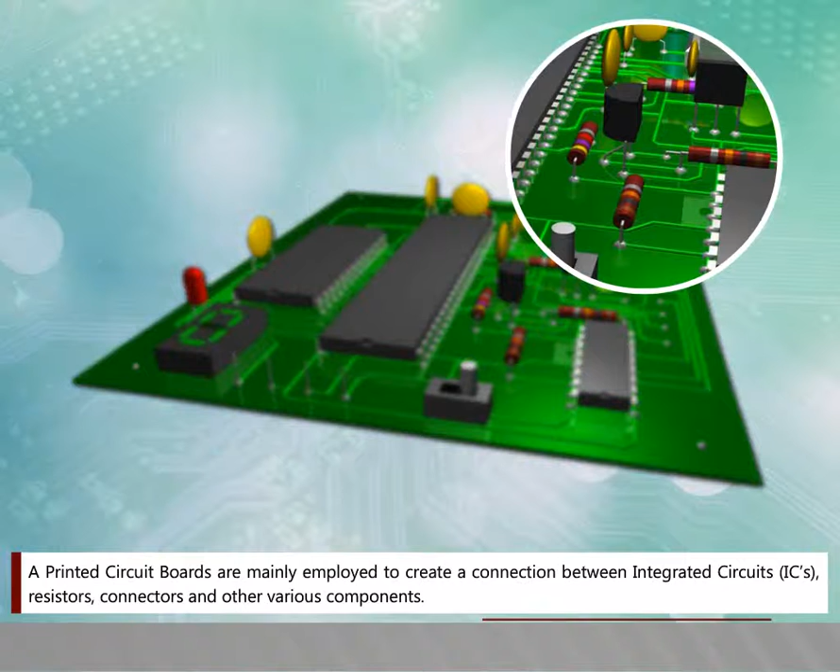Printed circuit boards are mainly employed to create a connection between integrated circuits (ICs), resistors, connectors and other various components. An electronic equipment is a combination of electrical and electronic components connected to produce a certain designed function.

In earlier days, electronic equipment was constructed by hand wiring and point-to-point soldering. During wiring, the wires were stripped of their insulation, tinned and soldered. Each discrete component was installed by hand, electrically and mechanically, and the circuit was too bulky and big to manage. So it was difficult to meet the demands for using those bulky equipments in aircraft, the health sector, and home emergency uses.

At these conditions, it became necessary to develop smaller and more compact electronic equipment. Smaller components were developed, decreasing the time between unit failure and repair due to easy replaceability. The use of miniaturization and sub-miniaturization in electronic equipment design led to a novel approach in inter-component wiring and assembly, known as the printed circuit board.

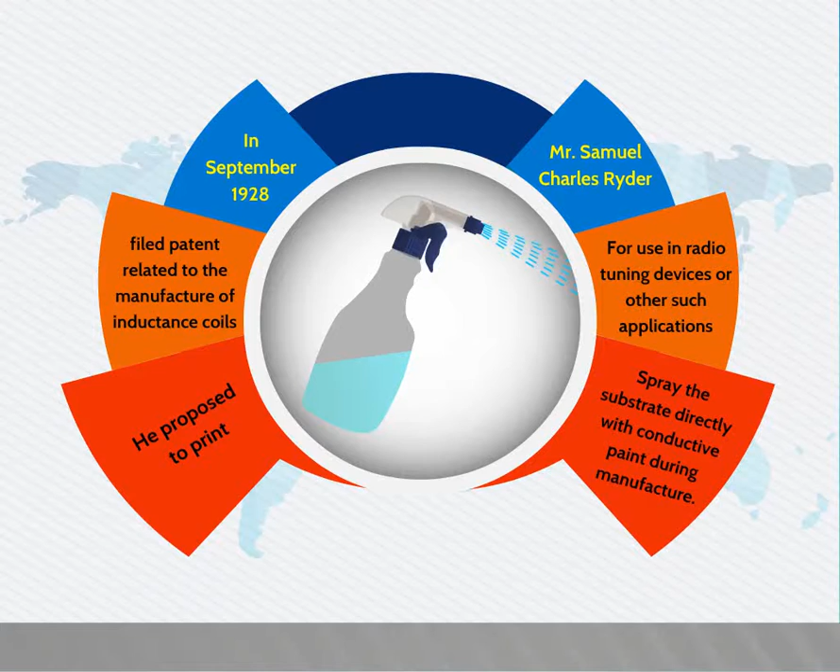Similarly, Mr. Herbert C. Alt, in July 1935 in America, again emphasized the avoidance of wires as the basic purpose of the development.

The major contribution towards the development of modern printed circuit technology came from Dr. Paul Eisler, who proposed copper-clad insulation material in sheet form for use as the base material in circuit board manufacture. He also proposed the generation of conductors on both sides of the copper-clad base material, with connection between conductors on both sides being made through eyelets.

So Dr. Eisler is often called the father of printed circuit board technology.

In the 1960s, the electroless method was introduced using catalyst activators, while Photocircuits USA developed the fully additive process in 1964. In this method, the base material does not have copper on it, and the copper is plated selectively on the required places for interconnections.

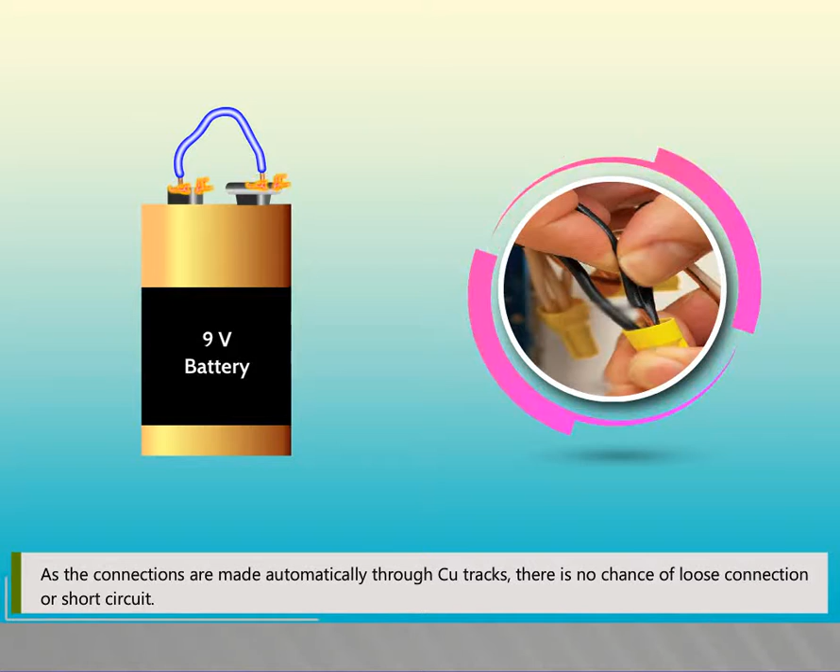The interconnections are made through copper tracks instead of using wires that carry the circuit. Much time is saved in assembling a circuit on printed circuit boards compared to the conventional one. As the connections are made automatically through Cu tracks, there is no chance of loose connection or short circuit. The size of component assembly is reduced with a corresponding decrease in weight.

Quantity production can be achieved at lower unit cost. Component wiring and assembly can be mechanized. Circuit characteristics can be maintained without introducing variation in inter-circuit capacitance. They ensure a high level of repeatability and offer uniformity of electrical characteristics from assembly to assembly.

The location of parts is fixed, which simplifies identification and maintenance of electronic equipment and systems. Inspection time is reduced because printed circuitry eliminates the probability of error. Printed wiring personnel require minimal technical skills, and chances of miswiring or short-circuited wiring are minimized.

Disadvantages of printed circuit boards.

As the copper tracks are very thin, they can carry little current, hence a PCB cannot be used for circuits with heavy currents, because in that case the strips will be heated up and can cause problems. Soldering needs precautions.

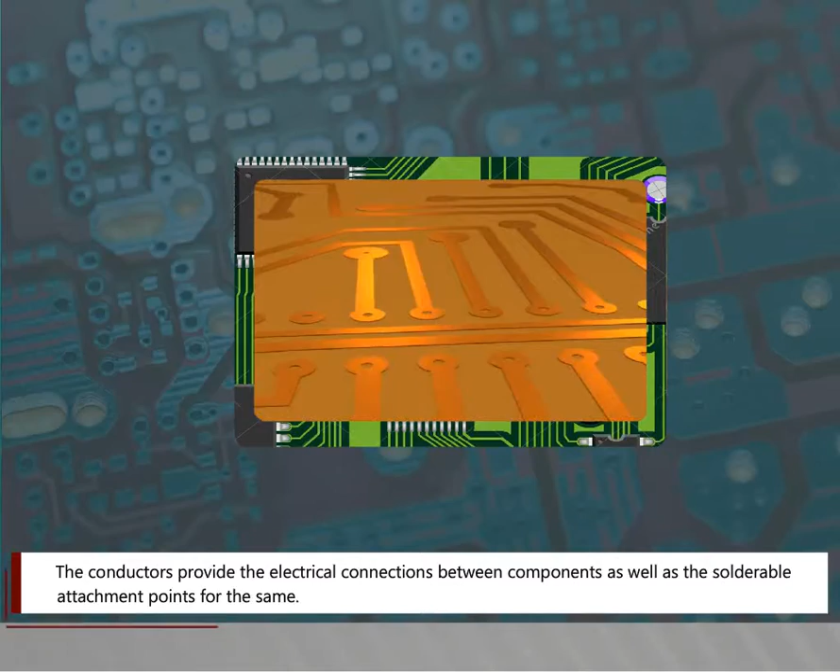The conductive areas are usually generated by means of a printing process like screen printing or photo engraving, which are commonly used to print drawings or inscriptions. So the term print became popular, hence it was named.

Composition of printed circuit boards. In this video, we are going to see the composition of a printed circuit board.

In PCB, there are alternating layers of different materials which are laminated together with heat and adhesive, which results in a single object.

Substrate. The base material or substrate is usually fiberglass. The commonly used fiberglass is FR4. This solid core gives the PCB its rigidity and thickness.

Copper. The next layer is a thin copper foil which is laminated to the board with heat and adhesive. On common double-sided PCBs, copper is applied to both sides of the substrate, whereas for lower cost, the PCB may have copper on only one side.

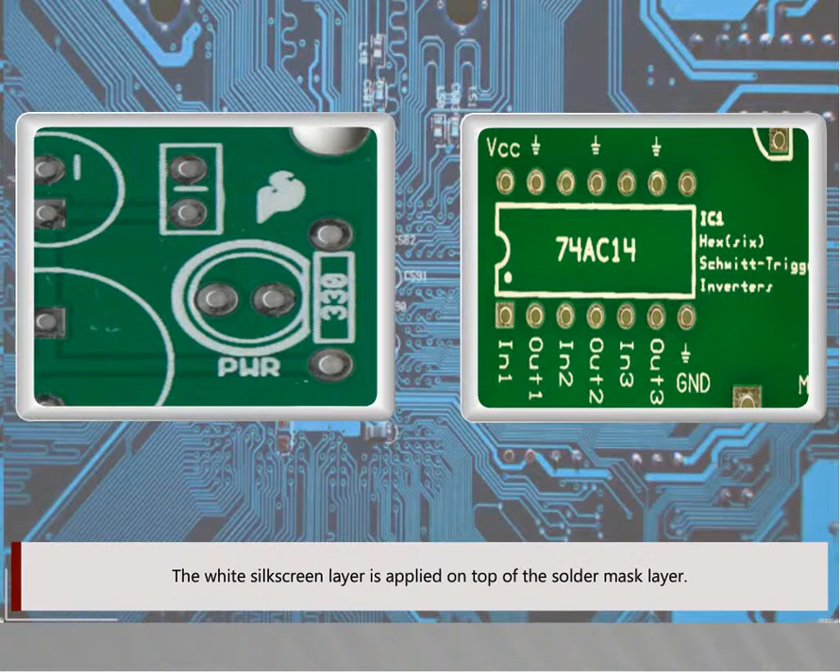Silk screen. The white silk screen layer is applied on top of the solder mask layer. The silk screen adds letters, numbers and symbols to the PCBs that allow for easier assembly and indicators for humans to better understand the board. Silk screen labels are used to indicate the function of each pin of an IC or LED.

Manufacturing of printed circuit boards, that is PCB. In this video, we are going to see how the printed circuit board is manufactured. The steps followed in the manufacturing of PCBs are given below.

Pre-processing, photolithography, etching, stripping, tin plating, drilling, solder masking, loading of components, soldering.

Pre-processing. In pre-processing, all the initial preparation is made before actual processing of the copper-clad laminate starts, which includes: layout of the circuit diagram should be taken as a printout.

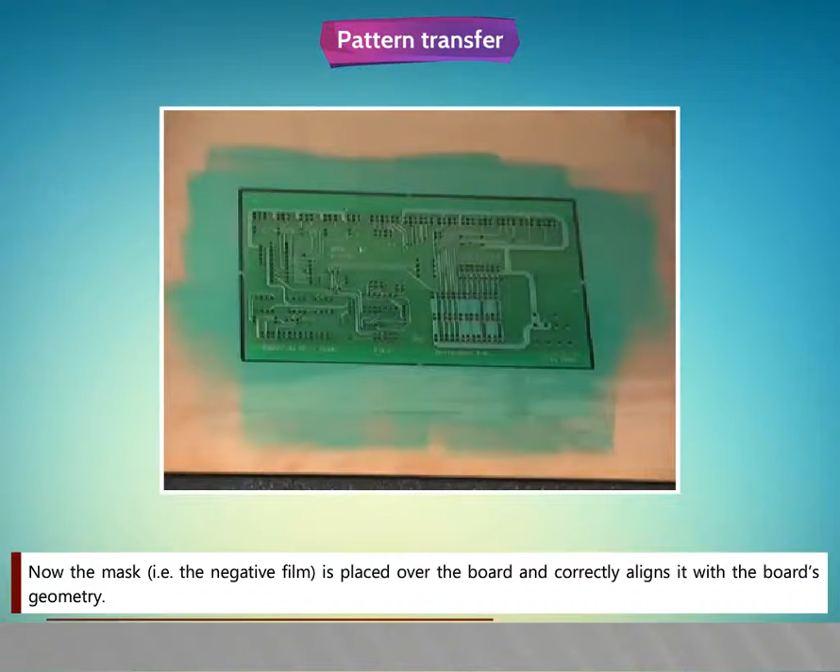The UV light falls on the photoresist only through the lighter or transparent part of the mask. To keep the negative film in position, masking tapes are used. The UV exposure machine is switched on for 3 minutes. Thus, the photoresist changes its properties only where exposed to radiation. Take out the boards from the UV enclosure by holding it from the edges, using forceps.

Development. After exposure, the pattern's image is transferred onto the photoresist and is to be developed. The development stage involves 2 steps based on the type of resist. For negative resist, unexposed areas of resist are removed. For positive resist, exposed areas of resist are removed. Here, we are explaining the negative photoresist method.

In a tray, sufficient developer solution is poured such that the board can be completely dipped in it. Developer solution is prepared by mixing liquid photoresist developer concentrate, 1 part, with 9 parts of water.

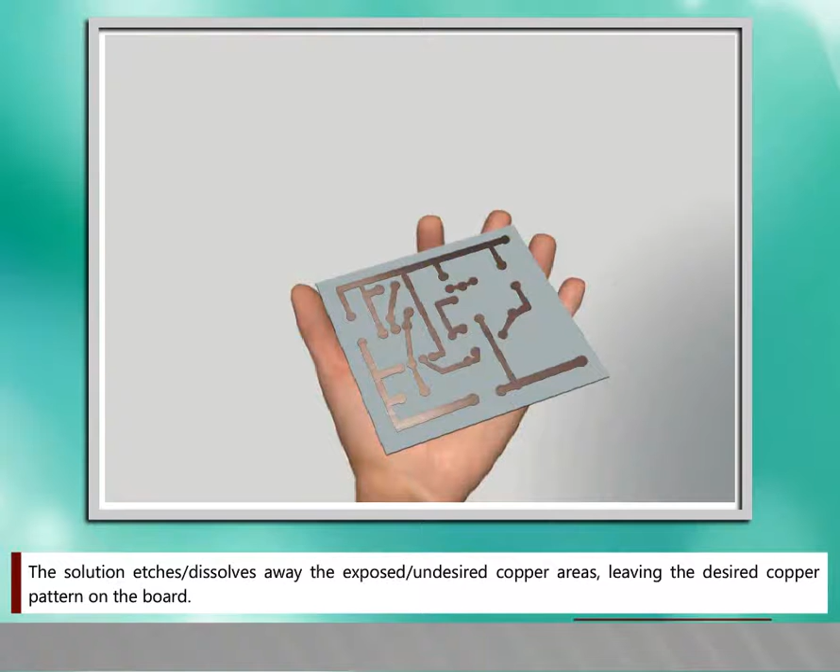The board obtained after photolithography is dipped in an etching solution and agitated for 6 to 10 minutes at 40 degrees Celsius. The solution etches or dissolves away the exposed or undesired copper areas, leaving the desired copper pattern on the board. Ferric chloride is the most commonly used etchant.

Step 4: Stripping. The negative photoresist coating left on the copper pattern can be removed using a tube of photoresist stripper after the etching process. The PCB is washed under tap water and dried using tissue paper.

Step 5: Tin plating. Tin plating is the process of providing a fine finish and protection to the copper from oxidation, which aids soldering to appear neater and flow better. A fine tin powder is mixed with water to make up a solution in a basin. The board is placed in the solution for 10 minutes to achieve a silver finish on the board.

Step 6: Drilling. Drilling is a process employed to create the component lead holes and through holes in a PCB. These holes pass through the land areas and should be positioned correctly.

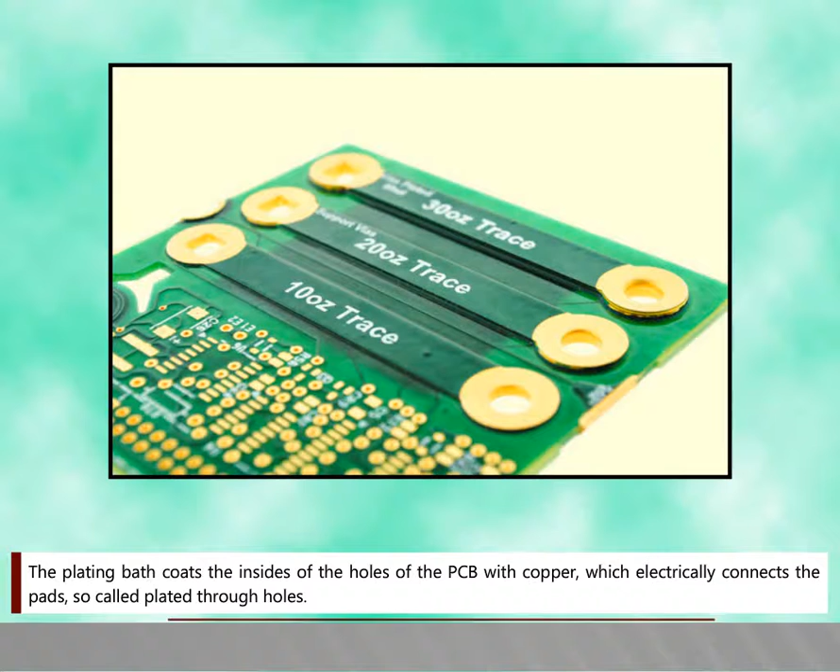To make electrical connections between pads on different layers of the PCB, the board is placed into a plating bath. The plating bath coats the inside of the holes of the PCB with copper, which electrically connects the pads, so-called plated through holes. The clearance is larger than the normal pad size to ensure that the plane stays isolated from the plated holes.

Solder masking. Next, a thin polymer layer is usually applied to the top and bottom of the board. This layer is called the solder mask or solder resist. Holes are opened into the polymer where the components will be soldered to the board.

To expose the pads and holes, the photolithography method is used. The solder mask protects the top and bottom copper pattern from oxidation and helps prevent solder bridges from forming between closely spaced pads.

Finally, silk screen markings are placed on the board to identify the position where components are to be placed. The silk screen is marked in white.

Step 8: Loading of components. Loading of components can be done manually or automatically.

Manual assembly can be tedious work and is typically used for prototype and low volume work. In post-automated assembly for odd form components, manual assembly is used. Both surface mount technology (SMT) and through-hole technology (THT) components may be assembled manually. In low volume work, an assembly line consists of several assemblers in which each person is responsible for mounting specific components. Manual assembly may involve both manual placement and soldering of the specific component, or a mixture of manual placement and automated soldering of the attached component, which can be interrupted several times.

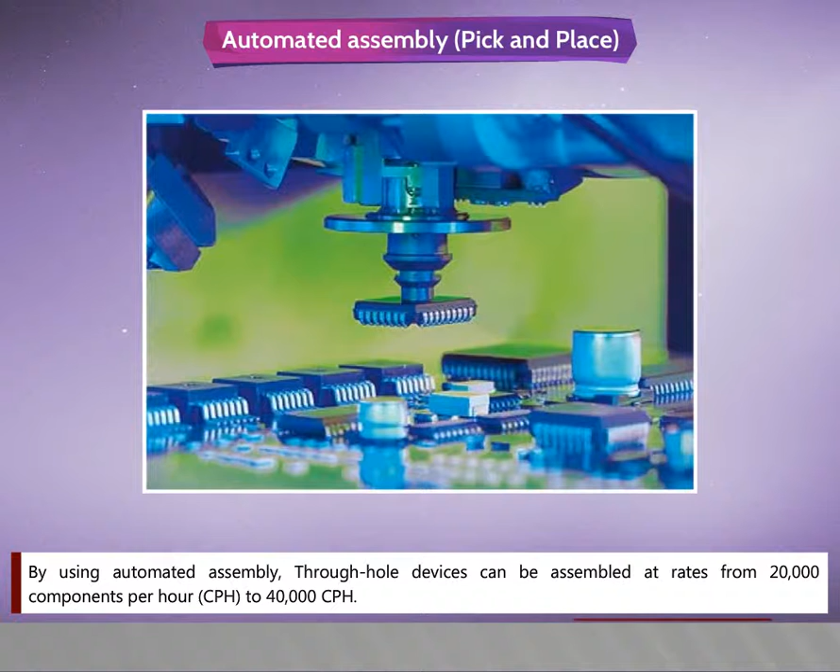Automated assembly, that is pick and place. Automated insertion processes exist for both surface mounted devices (SMD) and through-hole devices (THD), which include both axial leaded and radial devices. Automated machines are programmed to extract parts or components from reels or bins and place them on the PCB in the correct location and orientation. By using automated assembly, through-hole devices can be assembled at rates from 20,000 components per hour (CPH) to 40,000 CPH.

Soldering is used to attach the components physically to the PCB and also to provide electrical conductivity between the components' leads and the PCB traces. An intermetallic compound or alloy must be formed between the solder and the base material, that is the leads and traces, for the soldering process to be successful.

To protect the solder joint areas from oxidation, contact areas of the PCBs are dipped in a solder bath to receive a surface finish, and hot air solder leveling or plating processes such as electroless nickel or palladium are used. Just prior to or during soldering, the surfaces to be joined are cleaned, that is deoxidized, with flux so that the solder can flow over the PCB neatly and wet the surfaces of the PCB.

There are two general soldering methods: mass soldering, which includes wave reflow, vapor phase reflow, oven reflow, and conduction reflow; and directed energy, which includes hot gas, hot bar, laser, iron, and pinpoint torch.

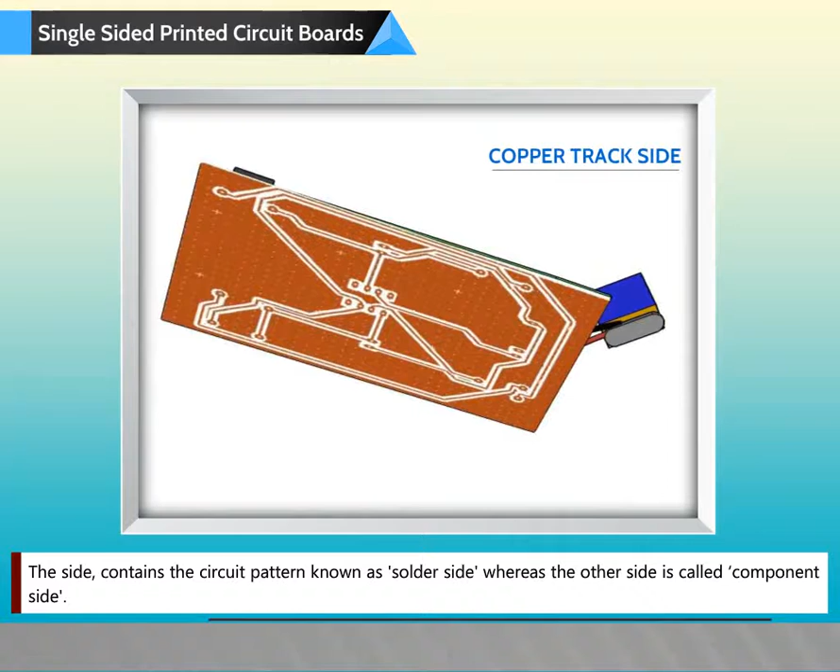The single-sided boards are manufactured by either the print and etch method or by the die-cut technique, using a die which carries an image of the wiring pattern, and the die is either machine engraved or photo engraved.

Normally, components are used to jump over conductor tracks. If that is not possible, jumper wires are used. The number of jumper wires on a board cannot be accepted beyond a small number due to economic reasons, which results in the requirement for double-sided boards.

Double-sided printed circuit boards. This video explains about double-sided printed circuit boards. Double-sided means having the wiring patterns on both sides of the insulating material. Thus, the circuit pattern is available on both the component side and the solder side. Compared to single-sided boards, the component density and conductor lines are higher in double-sided boards.

Double-sided non-PTH board is an extension of a single-sided printed circuit board. Its cost is considerably lower because of the absence of plating. In a double-sided non-PTH board, through contacts of the components are made by soldering the leads of the component on both sides of the board wherever necessary. The number of solder joints on the component side should be kept to a minimum at the layout design stage, to facilitate component removal from the board if required.

The conductor should be realized on the non-component side as much as possible, and only the remaining components should be placed on the component side. The non-plating technique in double-sided boards is shown, in which the interconnection is made by a jumper wire. A formed insulated solid lead wire is placed through the hole, clinched, and soldered to the conductor pad on each side of the board.

Different types of eyelets are also used for double-sided board interconnection. They are: funnel flanged eyelet, split funnel flanged eyelet, and fused in place eyelet.

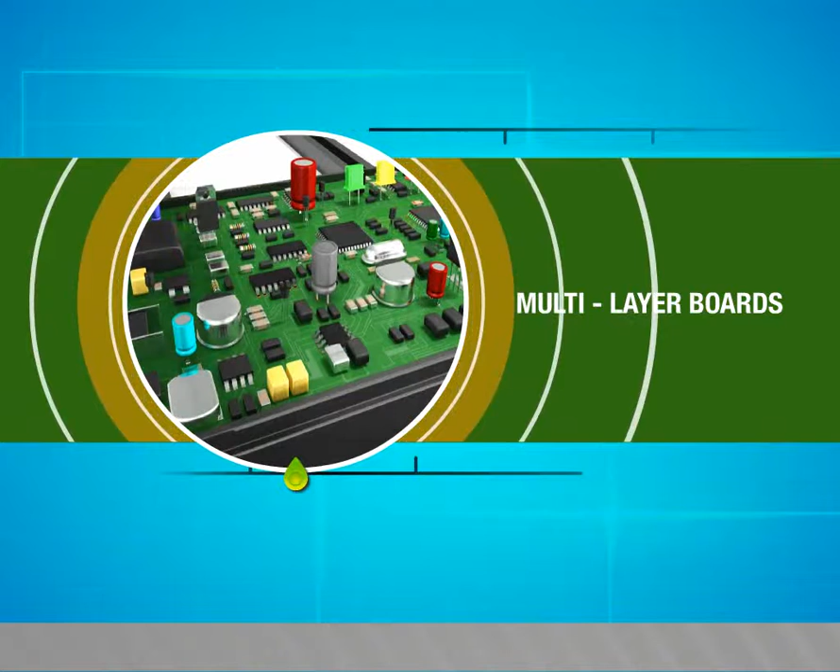Multi-layer boards. This video explains the multi-layer printed circuit board and drawbacks of plated through hole technology.

The multi-layer board makes use of more than 2 printed circuit boards with a thin layer of pre-preg material placed between each layer to make a sandwich assembly.

The printed circuit on the top view is similar to a conventional printed circuit board assembly, except that the components are placed much closer to each other, or they may have many terminals, which insist the use of additional board layers for the required interconnections.

The electrical circuit is completed by interconnecting the different layers of PCB by plated through holes, placed transverse to the board at allotted places.

In multi-layer PCBs, all the interconnections can be placed on the internal layers of the PCB, and a heat sink of thick solid copper can be placed on the outer surfaces of the PCB. By mounting the components directly on the metallic surfaces, the problem of heat removal and heat distribution in systems can be minimized.

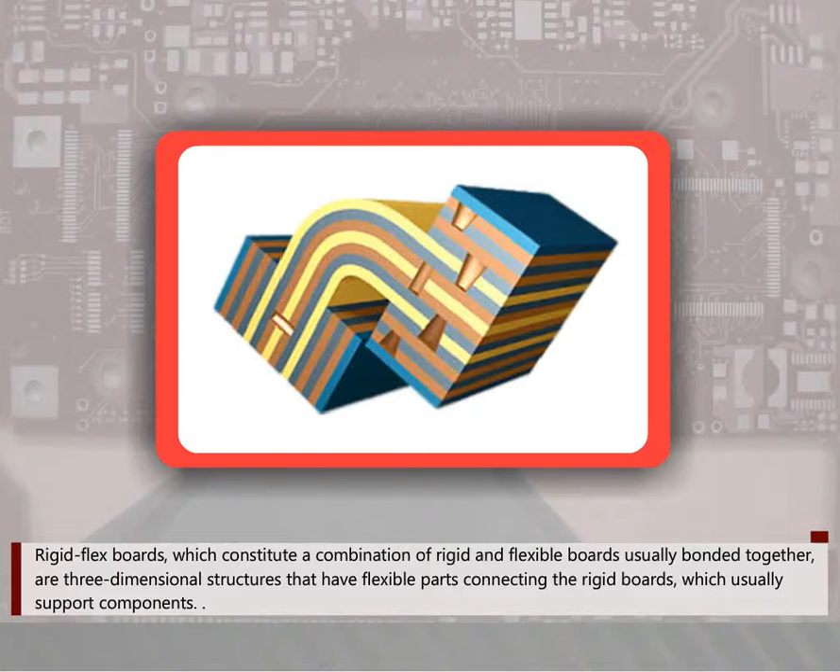Rigid flex PCBs constitute a combination of rigid and flexible boards usually bonded together. These boards are three-dimensional in structure, having flexible parts connecting the rigid boards in order to support components.

4-layer rigid flex circuit. A 4-layer combination rigid flex circuit has 4 conductive copper layers. Typically, a 4-layer has 2 flexible layers and 2 rigid layers.

6-layer rigid flex circuit. A 6-layer combination rigid flex circuit has 6 conductive copper layers. The two most common design types are: 6-layer rigid flex with 2 flex layers and 4 rigid layers, or 6-layer rigid flex with 4 flex layers and 2 rigid layers. 8-layer rigid flex circuit.

Rigid flex circuits combine the best of both rigid boards and flex circuits integrated together into one circuit. The 2-in-1 circuit is interconnected through plated through holes.

Rigid flex circuits provide higher component density and better quality control. Designs are rigid where extra support is needed and flexible around corners and areas requiring extra space.

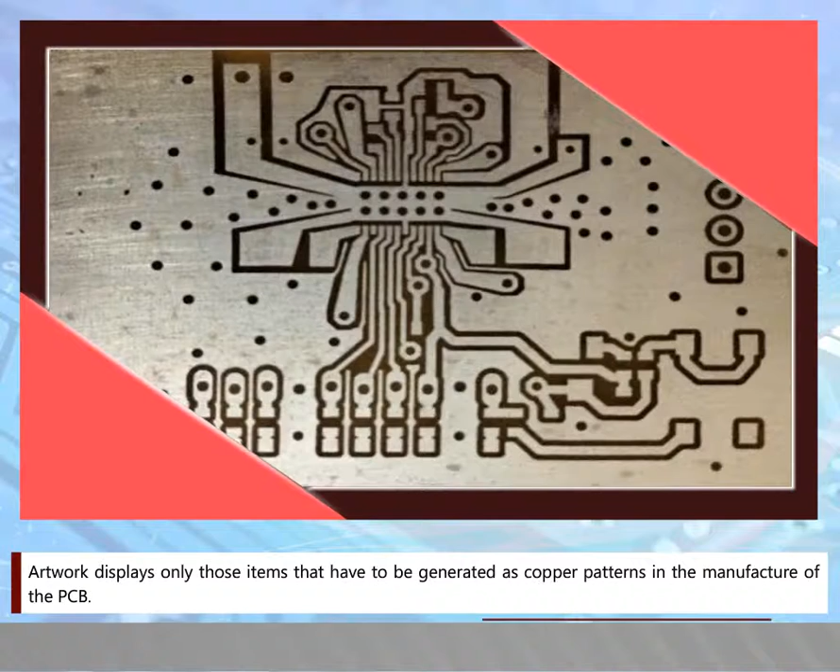Artwork displays only those items that have to be generated as copper patterns in the manufacture of the PCB. Therefore, the artwork will necessarily include solder pads, lands and conductors true to scale in respect of their dimensions, but shown at the scaled level.

In addition, the artwork will also show lines that represent the boundary of the board. Since the artwork is the first step of the PCB manufacturing process, it has a great influence on the final product. Obviously, the final product can only approach the quality and accuracy of the artwork.

The generation of artwork to the requested sophistication is highly dependent upon the area, that is board size and accuracy. Therefore, the importance of a perfect artwork should not be underestimated.

Problems like inaccurate registration, broken annular rings, or too critical a spacing observed on the PCBs often occur due to bad artwork. Developing a clean and exact artwork necessitates skills and patience on the part of the personnel entrusted with the task.

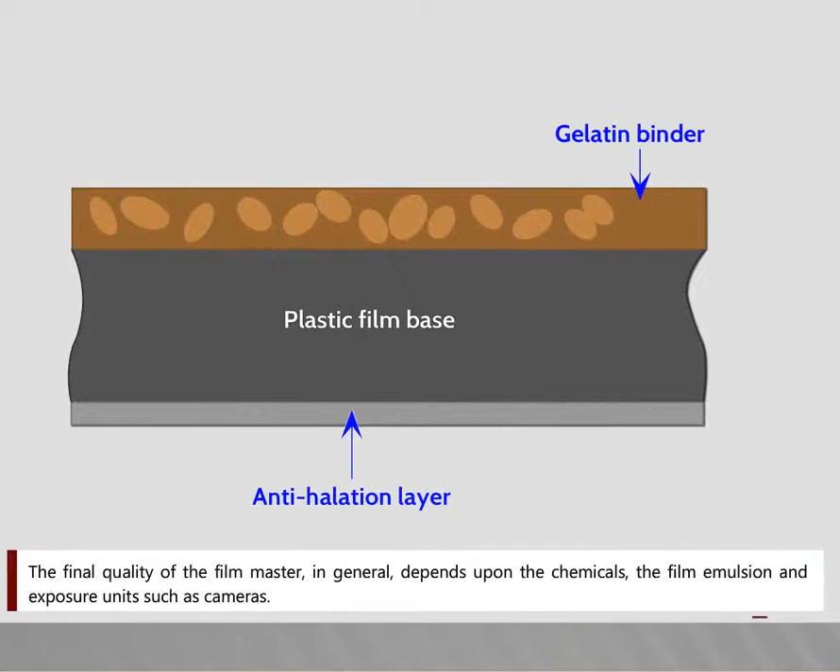In order to ensure PCBs of high quality, the film master must have dimensional accuracy, sharpness, and wear-out resistance. The final quality of the film master in general depends upon the chemicals, the film emulsion and exposure units such as cameras.

How it is prepared. Film master preparation follows the process given below: photographic film, film exposing through cameras, film processing in darkroom, film development.

Photographic film. The photographic film basically consists of two layers, the emulsion and the base. The emulsion is responsible for the photographic properties of the film, and has an approximate thickness of 5 to 10 micrometers. When unexposed, the emulsion has light-sensitive silver halides that are stabilized in gelatin or in a synthetic suspension.

Base: The material of the base can be acetate, polyester or glass, and has thickness of 100 to 250 micrometers. The dimensional stability of the film is primarily decided by the material of the base. The dimensional changes are usually expressed in ppm, that is parts per million. For highest dimensional stability, glass-based film is used. If the dimensional stability is not much of a concern, acetate-based film can be employed.

Accurate exposure time control. Conveniently accessible focus and operative control. Flat field type of lens. Free of spherical aberration. Color corrected and essentially distortion-free image.

The camera should be mounted on vibration-free mounts in a processing room or darkroom. The image formed on the photographic film depends upon the camera resolving power of the lens and light intensity. The exposure time depends upon the light source.

Cameras are of two types: vertical reduction camera and horizontal reduction camera. The horizontal camera basically permits bigger artwork and film sizes, whereas the vertical camera needs comparatively lesser floor space, but the copied board size is limited to enable a normal standing person to operate the camera conveniently.

Working principle of the camera: lamp, illumination optics, diffuser, test chart, diaphragm, shutter, reference surface, photographic material, vacuum bag.

The film processing room should be illuminated with safe light with filter. The type of safe light depends upon the type of film used. The safe light should not sensitize the film emulsion. Normally, yellow, orange or red light of 15-watt bulb is used. It must be mounted at least 120 cm away from the film processing area.

The photographic films consist basically of two layers, namely the emulsion and the base. The emulsion is light-sensitive silver halide. The light-sensitive chemicals are reduced or oxidized by light with a wavelength of 360 nanometer to 680 nanometer falling on the surface. This wavelength region determines the sensitivity of the photographic film. In the visible region, yellow, orange and red spectrums do not affect the film emulsion. Therefore, these colored lights are used as safe lights in the dark room.

Some useful items needed in the dark room work are trays of suitable size for developer, stop bath and fixing. They could be plastic or stainless steel. Film forceps to handle film during processing. Bath thermometer. Darkroom alarm clock. Refrigerator for storage of unused film. Storage space for artwork.

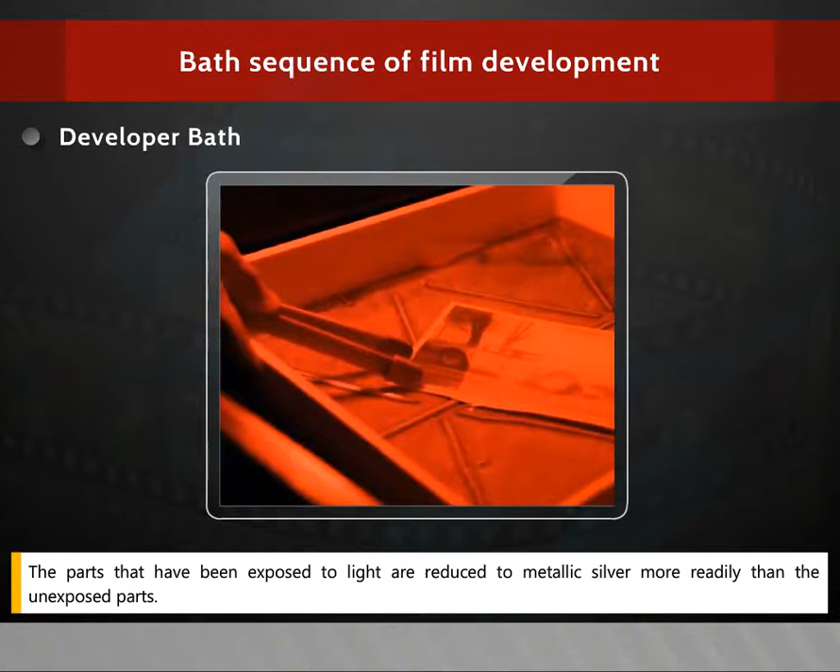The developer is a mixture of chemicals dissolved in distilled or deionized water. The developing time depends upon the concentration of the chemicals and the agitation of the bath.

Stopper bath: the function of the stopper bath is to effectively stop the development action. After the development is over, the film is lifted above the developing tray for a maximum period of 3 seconds, which enables the excess developer to drop, followed by immersion in the stopper bath. The film is immersed for about 30 seconds in the stopper bath, consisting of dilute acetic acid maintained at a temperature of 20 plus or minus 2 degrees Celsius. The stopper bath also needs moderate agitation.

Fixing bath: after developing, the unexposed grains are dissolved in the fixing bath, which contains a sodium thiosulfate mixture. The bright part of the object develops dark spots on the film, and the film is called a negative film. For fixing the emulsion properly, the film is immersed in the fixing bath.

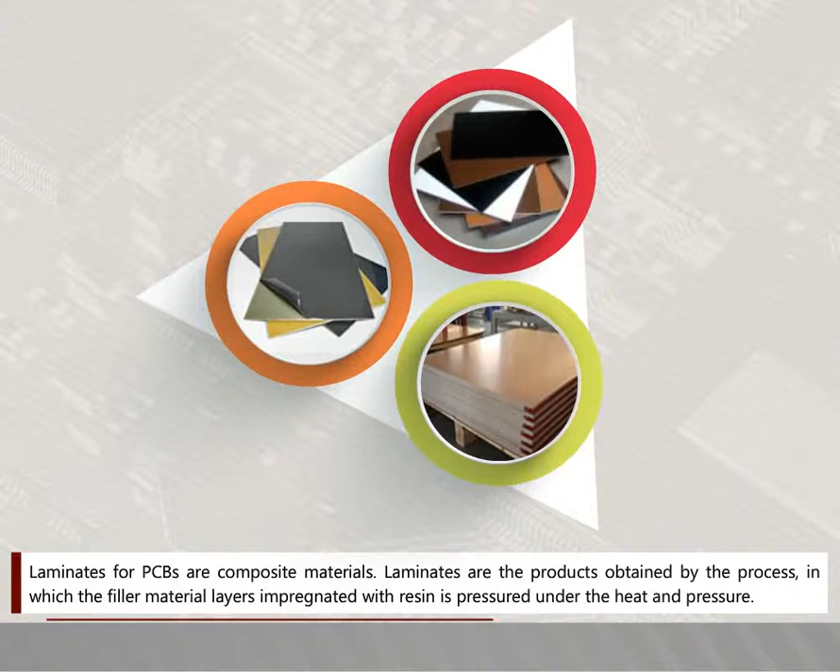Introduction to laminates. Laminates for PCBs are composite materials. Laminates are the products obtained by the process in which the filler material layers impregnated with resin is pressed under heat and pressure.

The primary function of the laminates is to provide mechanical support for electronic components as well as to interconnect the electronic components electrically.

The resulting thin insulating material, that is laminate, the mixture of filler (reinforcement) and resin on which all the conductors and components are mounted, is known as base material. This can be either rigid or flexible material.

Fillers, that is reinforcements, are meant to provide stability, mechanical strength, and rigidity to the laminate. Commonly used fillers are a variety of papers, cotton fabric, asbestos sheet, glass in various forms such as cloth, continuous filament mat, ceramic material, molybdenum, etc. But the most common materials used are paper and glass fiber.

Resins are used to impregnate the selected fillers. They are mostly synthetic types of materials formed by the polymerization process, which is either thermoplastic or thermosetting. To achieve higher thermal properties or improved chemical resistance, epoxy resins are modified with additives.

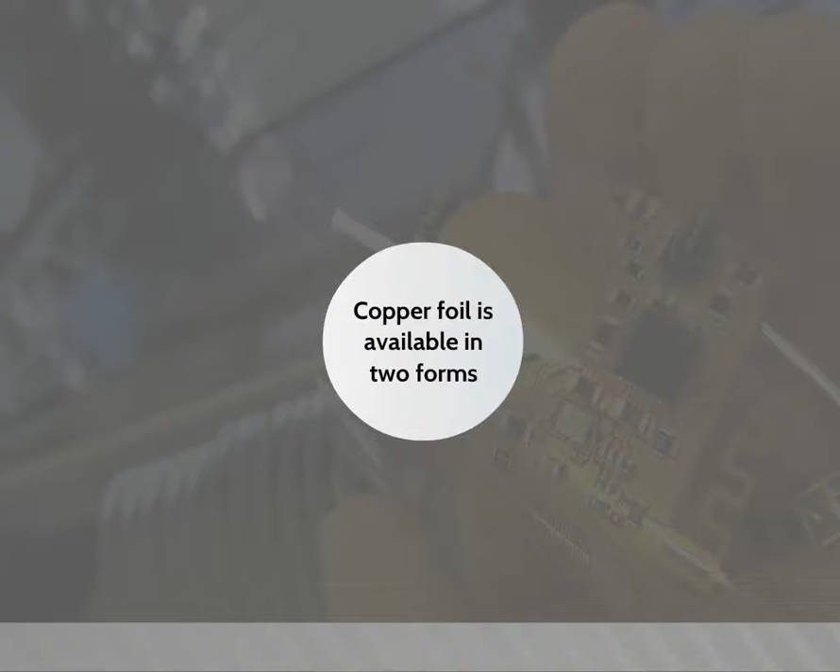Forms of copper foils. This video explains about the forms of the copper foil. Copper foil is available in two forms: rolled annealed copper foil and electrolytic copper foil.

Rolled annealed copper foil is mainly used in the flexible PCB manufacturing process. It is manufactured by melting electrolytically formed copper cathodes into large ingots. To get large copper foil rolls, the ingots are hot rolled in specially designed rolling mills and annealed.

Even though foil manufacturing is easier, it has some disadvantages like limited width, poor solderability, adhesion and ductility problems which are created due to grain structure deformation. The rolled copper foils which are produced by annealing electro-deposited copper at a high temperature are known as high temperature elongation, that is HTE foils.

Electrolytic copper foil is manufactured by the electroplating method. The tank has a polished stainless steel or lead rotating drum which acts as a cathode and pure copper as the anode. Both anode and cathode are immersed into the copper sulfate electrolyte.

Copper-clad laminates are manufactured by pressing layers of filler material impregnated with resin under heat and pressure with copper foil using a hydraulic press.

The materials needed for the manufacture of laminates are glass fabric (that is filler), epoxies (that is resin), and copper foil.

In most laminates, glass cloth acts as the main structural reinforcement. The rigidity and strength offered by glass cloth enhances the binding, encapsulating, and insulative properties of the epoxy resin.

The singular fiberglass filament is the building block. Using these, glass cloths are constructed together to form a yarn or bundle.

Epoxy resins. The function of the resin is to function as a glue to hold or impregnate the laminate together. Epoxy resin in a liquid form is used to concoct A-staged resin using proprietary recipes and processes.

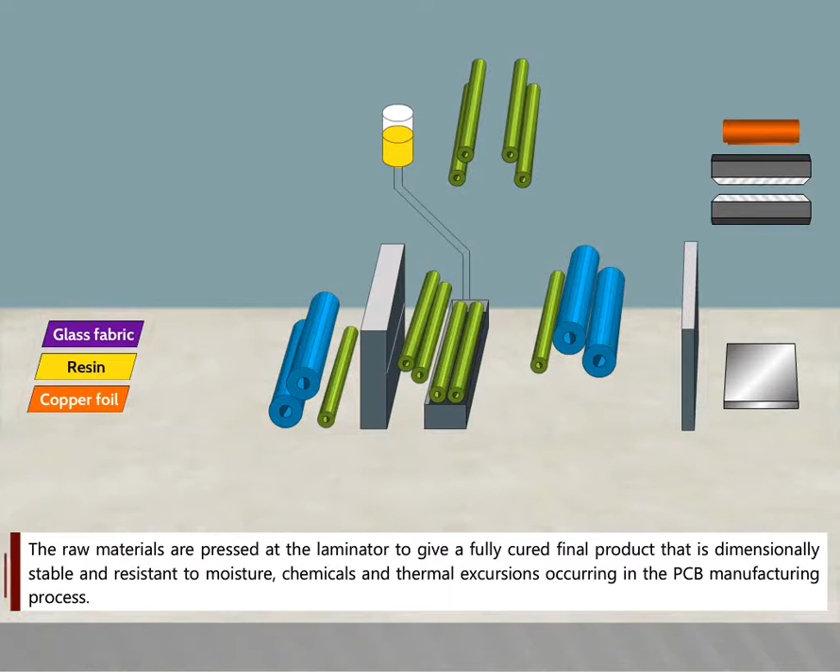The raw materials are pressed at the laminator to give a fully cured final product that is dimensionally stable and resistant to moisture, chemicals, and thermal excursions occurring in the PCB manufacturing process. This is the process utilized in bringing the main raw materials together to form a copper-clad laminate.

Treating. Treating is the process in which the liquefied resin is applied to the glass cloth via a combination of immersion and metering rollers. The treated cloth is then subjected to a controlled heat source to semi-cure the resin. The heat source is a drying oven, which may be air-circulating type or infrared type.

Most of the volatiles are driven off. The impregnated glass sheet is now dry to the touch, and this stage is generally referred to as pre-preg, or B stage.

During treating, the immersion and metering process are critical, so rigid process control is necessary. Thorough wetting of the glass cloth by the resin, leading to precise control of the resin quantity absorbed, is of utmost importance for laminate consistency and quality.

Layup. Layup is the process of assembling the treated prepregs and copper foils to be pressed. In this operation, the copper foil is first laid against a large polished stainless steel press plate, then a number of sheets of prepreg are laid on top of the copper, the number of layers based on the desired thickness of the laminate.

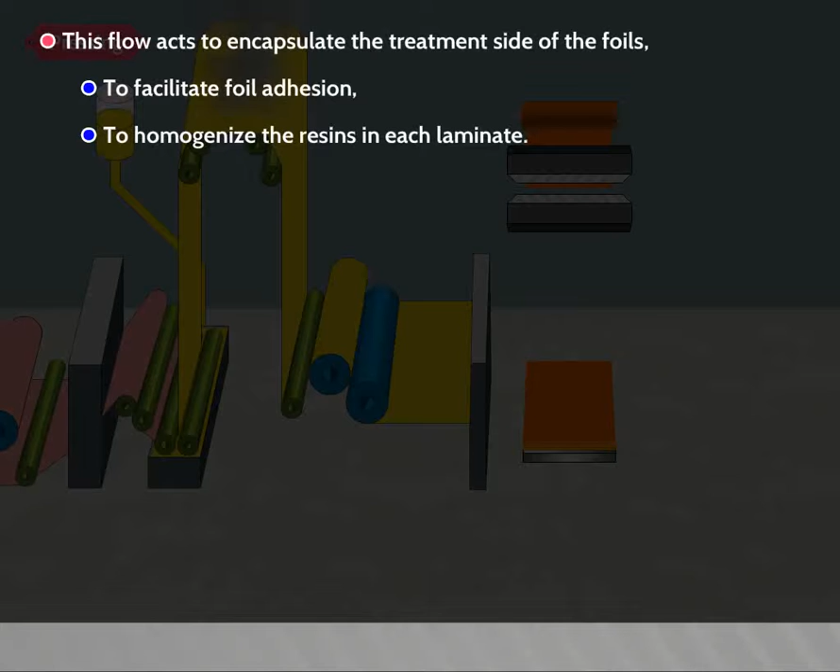After a certain period of time, the epoxy groups in the liquefied resin begin to form crosslinks, leading to curing of the resin.

Thermocouples are placed in several sheets to monitor and control temperature, while a timer automatically records time against a preset cure cycle. When curing is completed, the steam is automatically cut off. Press cooldown begins, and the press books are cooled to a temperature of 80 degrees Fahrenheit.

The edges are trimmed from the sheet to remove the irregular excess resin flow areas after removing the material from the press. At this stage, the laminate sheets are sheared down to the desired sheet or panel size.

Quality control. During the manufacturing process, several quality control checks need to be implemented to ensure uniformity in thickness of the laminate, lamination integrity - that is, endurance of extreme thermal, mechanical and chemical abuses - bow and twist, surface quality, and dielectric variations.

Knowledge of the laminate manufacturing process will be helpful for designers, fabricators and assemblers in understanding the capabilities and limitations of this critical building block of PCB manufacture.

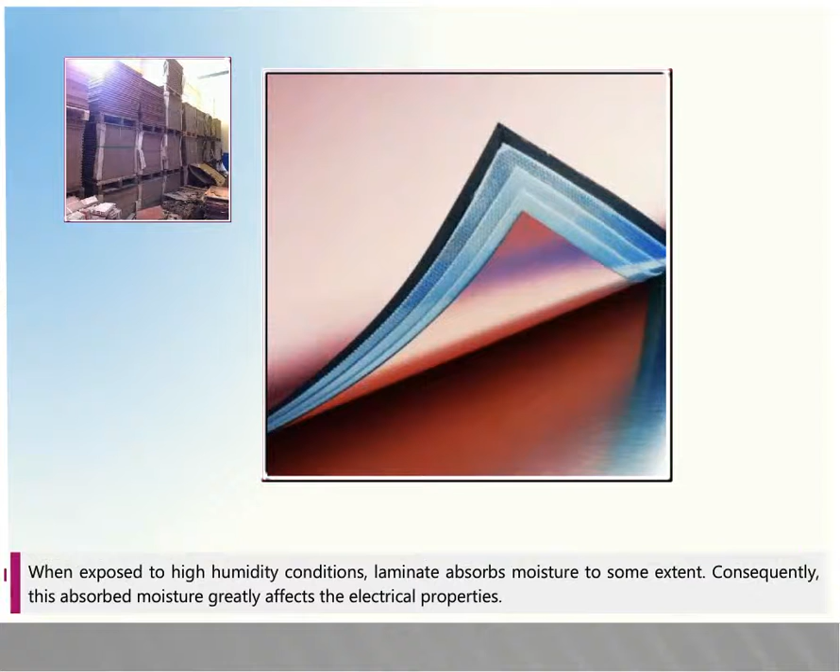The electrical properties of a laminate depend upon the electrical properties of the filler, cured resin, and the byproducts of the curing reaction. When exposed to high humidity conditions, laminate absorbs moisture to some extent. Consequently, this absorbed moisture greatly affects the electrical properties.

Dielectric strength. This is the ability of an insulating material to resist the passage of electric current of a disruptive discharge produced by an electrical stress. It depends upon a large number of factors pertaining to the material such as chemical composition, molecule structure, degree of moisture, thickness, cleanliness, roughness of surface, material aging.

Dielectric constant. Dielectric constant is the ratio of the capacitance of a capacitor with a given dielectric to the capacitance of the same capacitor with air as dielectric.

It is calculated from the capacitance as read on a capacitance bridge, the thickness of the sample and the area of the electrode. The dielectric constant is also referred to as permittivity, and it measures the capability of an insulating material to store electrostatic energy. It varies with the thickness, temperature, humidity and frequency and chemical composition of the material.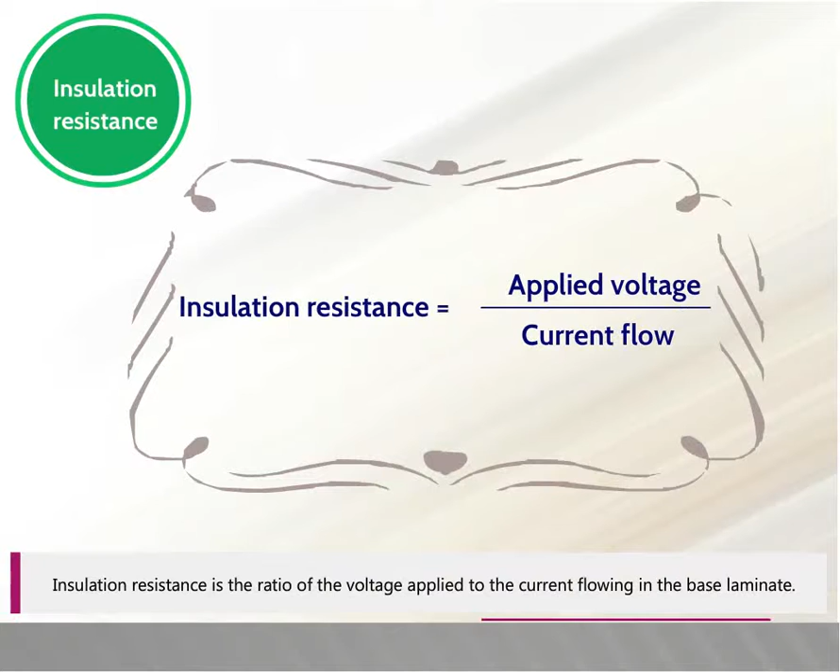Insulation resistance. Insulation resistance is the ratio of the voltage applied to the current flowing in the base laminate. The change in resistance under a specified environmental condition is usually more significant. Insulation resistance varies with the environmental conditions and the process techniques of the test samples. During testing of the insulation resistance, the test specimen should be placed in the same environment as would be available

in the final application. Surface resistivity. Surface resistivity is the resistance to electrical leakage current along the surface of an insulating material. This depends upon surface humidity, cleanliness, finish, temperature, and environmental conditions, among other things.

The surface resistance between 2 points on the surface on any insulation material is the ratio of the DC potential applied between the 2 points to the total current between them. This is measured by using a 3-electrode circular system as shown in figure.

The electrodes are formed by removing the metal foil completely by etching, but leaving the foil outlines on the specimen to form the edges of the electrodes. The guard electrodes on the opposite, kept at positive potential, help to avoid stray currents passing through the laminate.

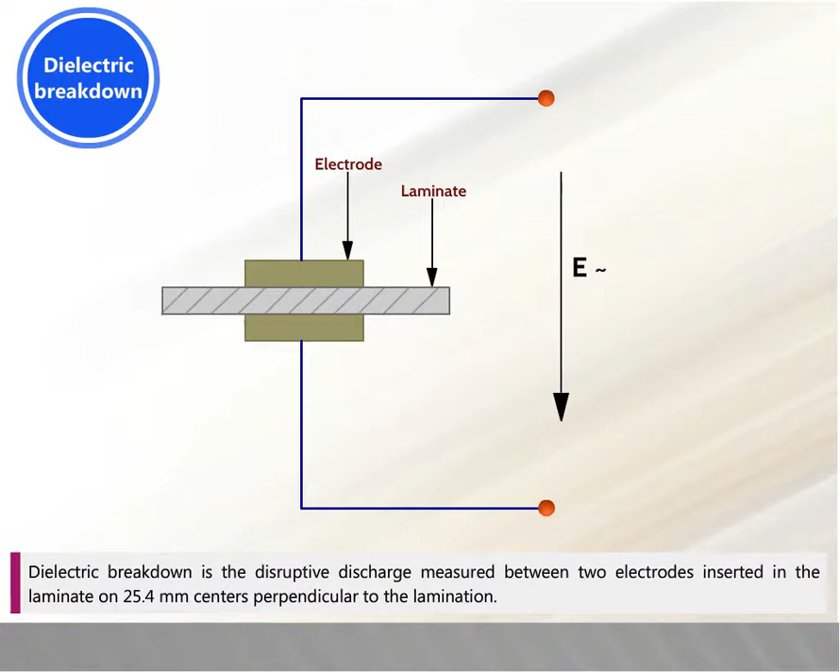sample. Dielectric breakdown. Dielectric breakdown is a disruptive discharge measured between 2 electrodes inserted in the laminate on 25.4 mm centers perpendicular to the lamination. The test is carried out in oil in a similar manner like measurement of the dielectric strength.

Standards of laminates.

IPC 2531 Standard Recipe File Format (SRFF) specification outlines the requirements that our SRFF file must meet, describes the file format, outlines the file sections, and indicates how data should be represented through objects which can either be vendor independent or specific.

IPC 2547 Sectional Requirements for Shop Floor Equipment Communication Messages (CAMX) for printed circuit board test describes event message content and an XML encoding scheme which enables a detailed definition of messages in the domain of electronics inspection, test, and repair or rework, that is product and process quality.

IPC 2571 Generic Requirements for Electronic Manufacturing Supply Chain defines an XML encoding scheme to facilitate supply chain interactions. The scheme is defined for bill of materials, approved manufacturer list, and changes in engineering, manufacturing, or product.

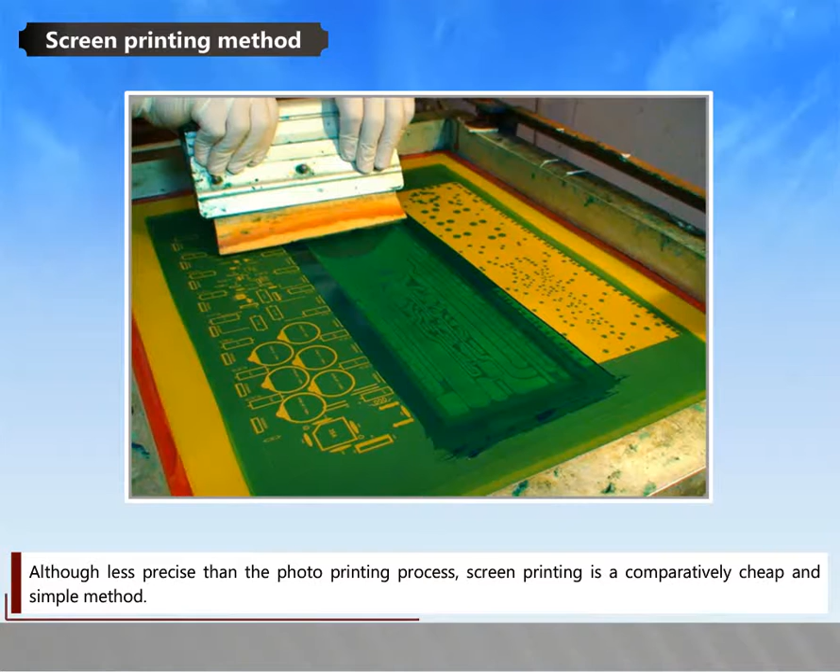Photo printing is an extremely accurate process which is generally applied to the fabrication of semiconductors and integrated circuits. Such a precision technique is not required in the production of general-purpose PCBs. Screen printing, although less precise than the photo printing process, is a comparatively cheap and simple method. The majority of PCBs produced worldwide are screen printed.

Photo printing of PCBs basically means applying photosensitive material having the ability to form a continuous film which is sensitive to light or other radiation, so that the exposed or unexposed areas of the film can be further processed without affecting the unexposed or exposed areas. This photosensitive material is called photoresist. The essential property of a photoresist is that exposure to proper radiation should produce a change in it to enable a clear distinction in later operations between the exposed and unexposed areas.

The photoresists are sensitive to ultraviolet light with a wavelength of 200 to 500 nanometers. Like the photo tooling film, the photoresist has a safe visible light area in the yellow to red wavelength, that is 560 to 700 nanometers. Photoresist can be classified as wet film, that is liquid film, and dry film, that is solid film resist.

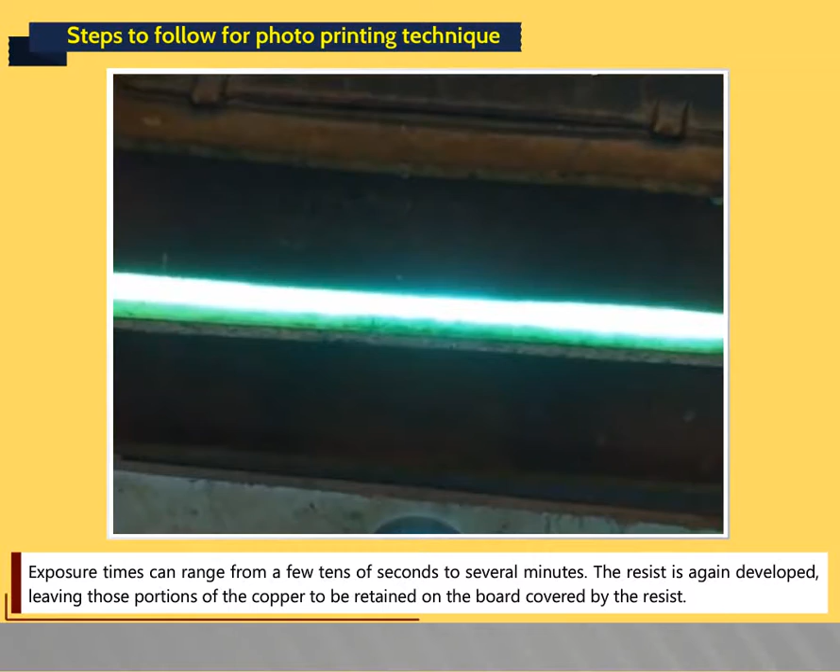The resist is then developed, leaving those portions of the copper to be retained on the board covered by the resist. In the case of liquid resist, two additional steps are employed: applying a dye to the resist so that it is visible on the board, and baking the resist at about 80 to 100 degrees Celsius for 10 minutes so as to harden the resist before the etching process.

Liquid photoresist, that is wet film resist. The wet film resists are organic liquids. When exposed to light of a proper wavelength, they chemically change their solubility to certain solvents, that is developers.

The factors that help determine the correct chemical and physical performance of the wet film resist are the chemical constituents, the mixing ratios, the residual solvents, and monomer levels.

The wet film resist is coated on the laminate by several techniques such as dip, spray, roller coating, and flow. In dip coating, the board is dipped into the resist and pulled out slowly. The coating is usually thicker at the bottom of the board than at the top.

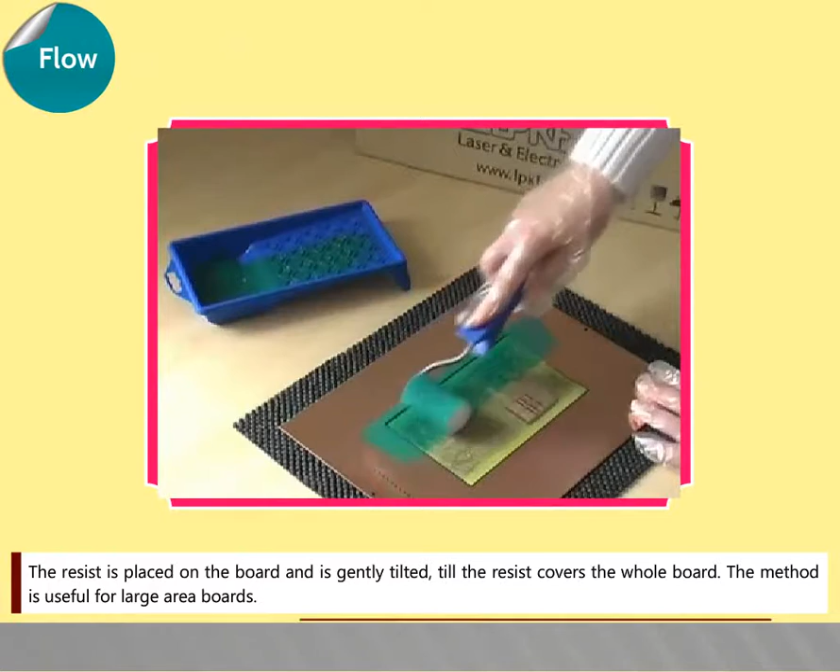Flow: the resist is placed on the board and is gently tilted till the resist covers the whole board. This method is useful for large area boards. After applying, the resist is normally baked at 80 degrees Celsius for a few minutes so that it is hardened.

Liquid photoresists in general have been difficult to work with because the coating thickness is uneven and plated through holes have plugs of resist that are difficult to remove. Pinholes, that is dirt, in the resist image necessitate inspection and quite often require a touch-up operation.

Liquid film photoresists are classified as positive acting resist and negative acting resist.

Dry film photoresist: cover sheet, polyester, resist film, copper foil, base material.

For the production of professional grade PCBs, dry film photoresists are widely used in PCB manufacture. The dry film resist is available as a composite material consisting of 3 different layers.

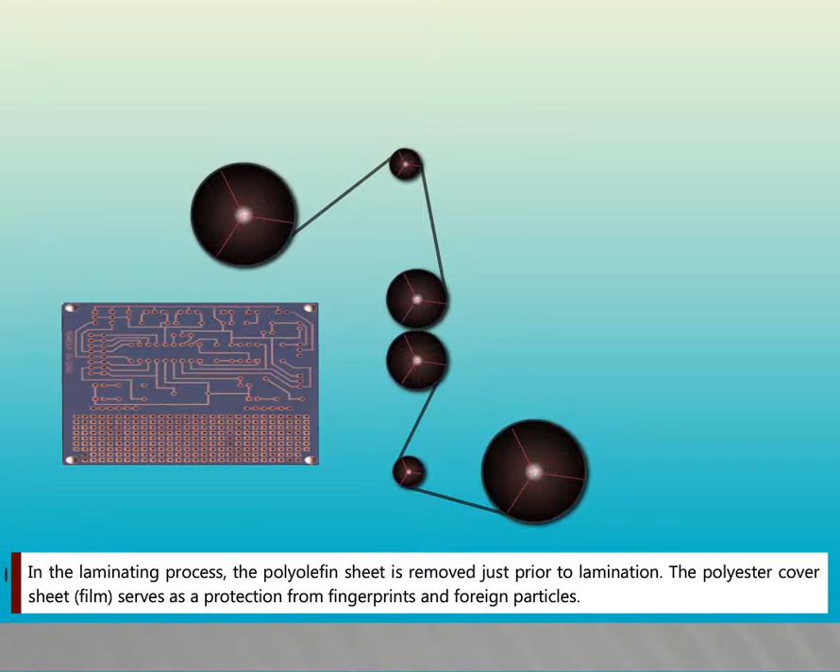As the board passes through the laminator, the photopolymer is applied to the board surface by using heat and pressure. In the lamination process, the polyolefin sheet is removed just prior to lamination. The polyester cover sheet, that is film, serves as protection from fingerprints and foreign particles.

The protective layer is removed only before the development of the exposed resist. The polyester and polyolefin layer allows the dry film resist to be wound into rolls and packaged in lengths of 122 to 305 meters, that is 400 to 1000 feet.

Screen printing: this video explains the process of screen printing and the materials needed for screen printing. The photographic image is transferred to copper-clad laminate by the screen printing technique.

This technique has been used for a long time for printing cloth, panels, and so on, and reaches its maximum degree of accuracy when applied to PCB manufacture. The technique is particularly adopted for low-cost print and etch, and plated printed boards.

A screen comprises an aluminum frame, mesh, emulsion, and adhesive bonding. The emulsion is removed by a photochemical process where deposition is required. The flexibility of the emulsion creates a good gasket against the PCB and aids print definition.

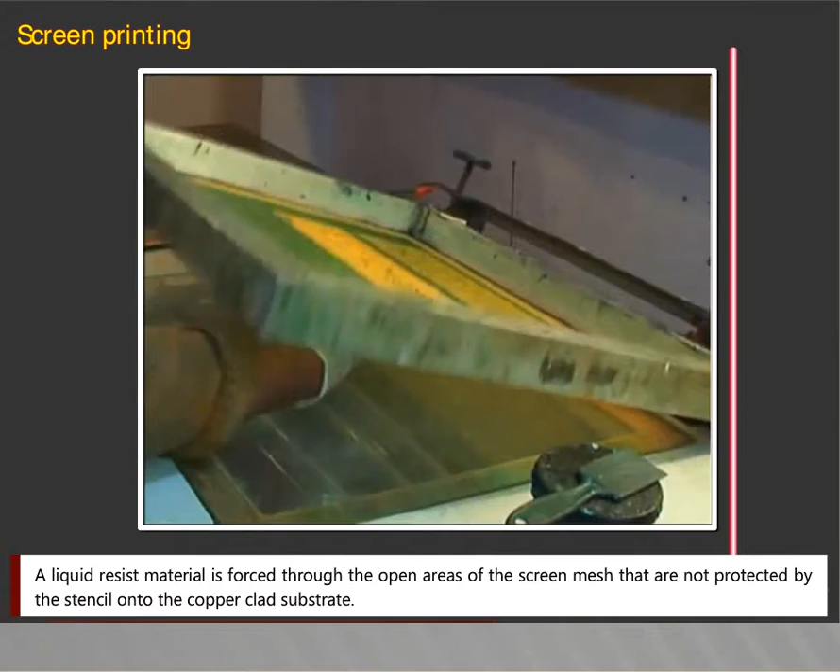A liquid resist material is forced through the open areas of the screen mesh that are not protected by the stencil onto the copper-clad substrate.

By the pressure of a squeegee, the top surface of the screen is wiped, and the squeegee pressure deflects the screen downward into line contact with the substrate. As the squeegee passes a given point, leaving screen ink behind, screen fabric tension snaps the screen back.

Screen frame. The frame, a screen fabric of uniform mesh or opening, is stretched, which provides a support. Normally, two types of flat screen frames are used: rigid type and adjustable type.

Rigid type frame: adhesive pasted part, rigid aluminum frame, screen mesh. Adjustable type frame: floating bar, bolt with wing nut for adjusting tension. Side of frame.

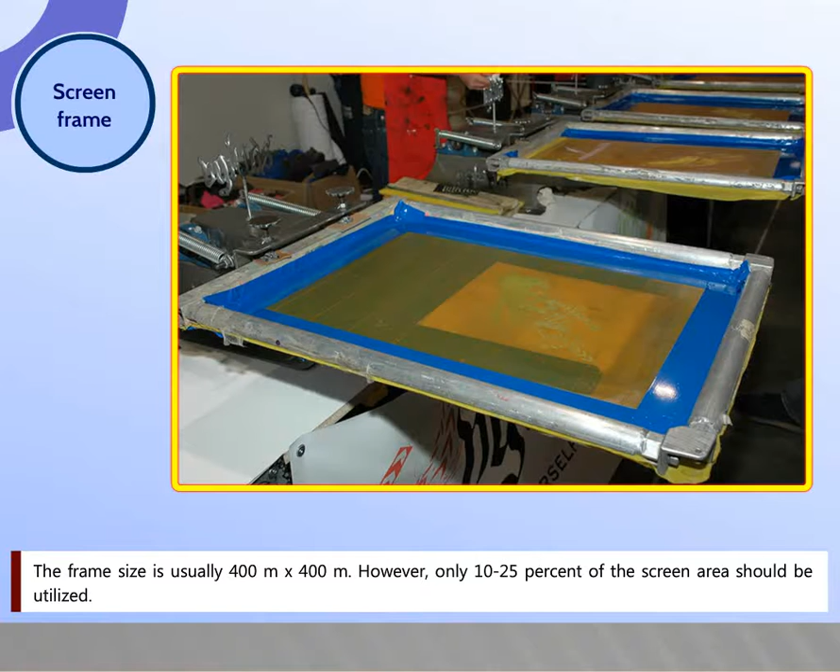Normally, aluminum alloy is used for rigid type and stainless steel frame for stretchable type, that is, variable tension frames. The frame size is usually 400 meter into 400 meter. However, only 10 to 25% of the screen area should be utilized.

Screen cloth. The woven mesh fabric used in screen printing may consist of stainless steel, silk, polyester, nylon or similar material. The threads of the above fabrics are classified into the following two types.

Monofilament: a monofilament is woven with single thread fibers. The examples are stainless steel and phosphor bronze, nylon and polyester. Multifilament: a multifilament cloth is woven with more than one fiber or many separate fibers. The examples of multifilament are silk and polyester.

Screen fabrics are classified based on mesh counts, mesh opening, and the percentage of open area or ink coverage area. The screen fabric mesh is classified according to the number of threads or wires, that is openings, per linear centimeter, and thread or wire diameter.

The larger the mesh classification number, the more wires per linear centimeter, and therefore the smaller the openings, the finer will be the resulting circuit image. But sometimes it will be more difficult to push the screen ink through the small screen openings onto the substrate surface.

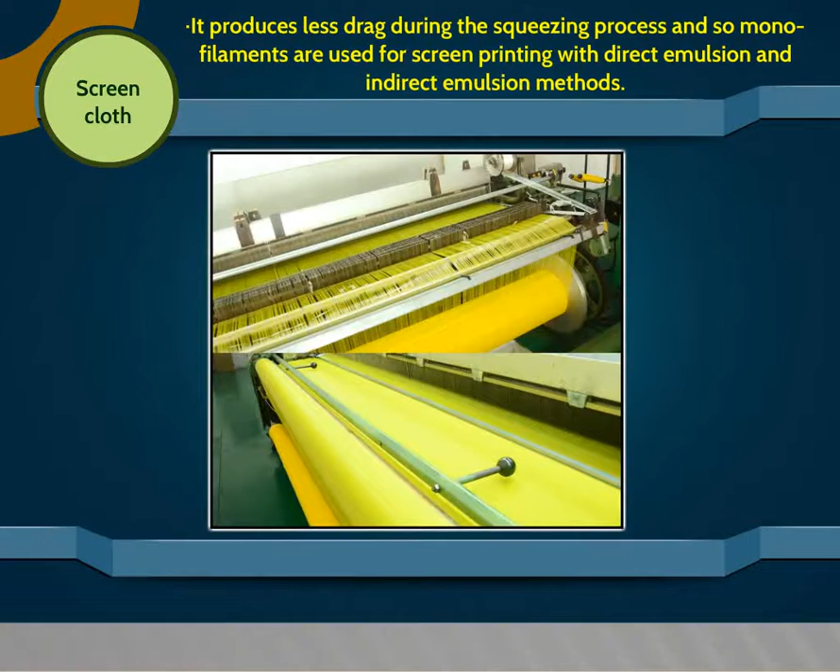It produces less drag during the squeegee process, and so monofilaments are used for screen printing with direct emulsion and indirect emulsion methods. Typically, maximum particle size should be no longer than 1/3 of the mesh opening to prevent jamming.

The thickness of ink deposit is controlled by the fabric material. For determining the correct mesh count of the fabric, theoretical color volume is used. The theoretical color volume is the amount of ink held in the fabric prior to the passage of the squeegee during the printing stroke, and it is determined by the thread count, thread thickness, and mesh opening.

The edge definition of the image produced by the printing screen varies according to the mesh opening M0 and thread thickness D.

The printing fabrics differ according to the quality of the threads, that is HD, T, S thread types. S: thin mesh grades. HD: heavy duty mesh grade. T: medium mesh grade. The most commonly used thread types for screen printing in the PCB industry are T-type and S-type.

Screen preparation. The screen is prepared by considering various factors such as the image transfer line and space requirement, panel size, fabrication process, run length, etc. It is followed by properly selecting the fabric type, mesh size, frame, stencil, and ink.

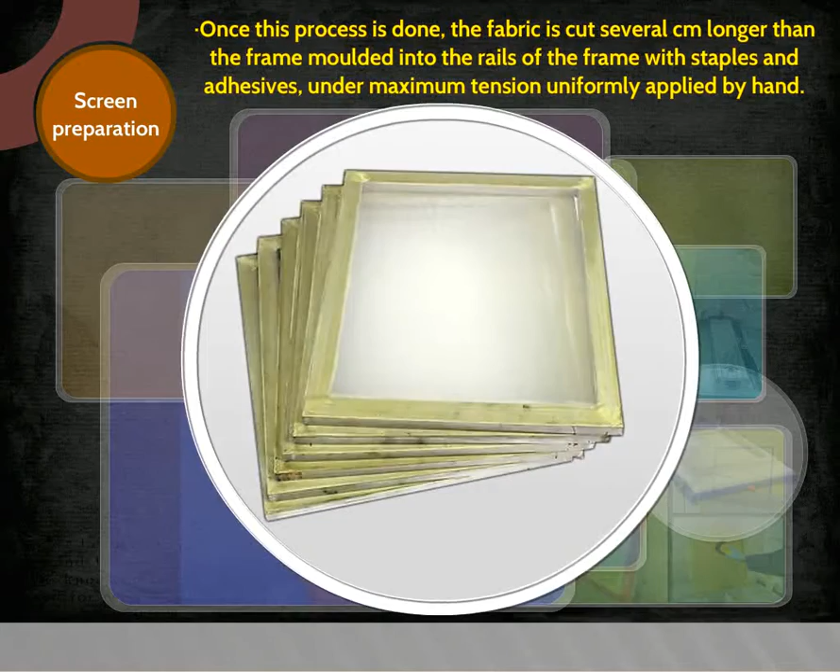Once this process is done, the fabric is cut several centimeters longer than the frame, then the fabric is mounted into the rails of the frame with staples and adhesives under maximum tension uniformly applied by hand.

The correct stretching of the fabric is very important in the process of circuit printing, else it will cause poor registration of the printed detail, color pattern, off-contact printing, loss of open mesh, and loss of ink passage.

During the stretching, the frame should be rigid and the threads should be parallel or at an angle of 45 degrees to the sides of the frame. The sides should not bend during stretching. The tension of the screen should be maintained between 10 to 15 Newton per centimeter.

The screen is stretched over the frame in the following ways. The fabric is stretched permanently using special adhesive or nail on the frame, and in this case, the tension is not adjustable. For stretching, equipment like a pneumatic system, that is, using air pressure containing pneumatic clamps, can be used.

The fabric can also be stretched by using a floating bar frame. The screen tension is adjustable in this case. Once the stretching is complete, the tension of the fabric is measured using the tension gauge. The meter is placed on any part of the screen fabric and the reading becomes available on the gauge dial.

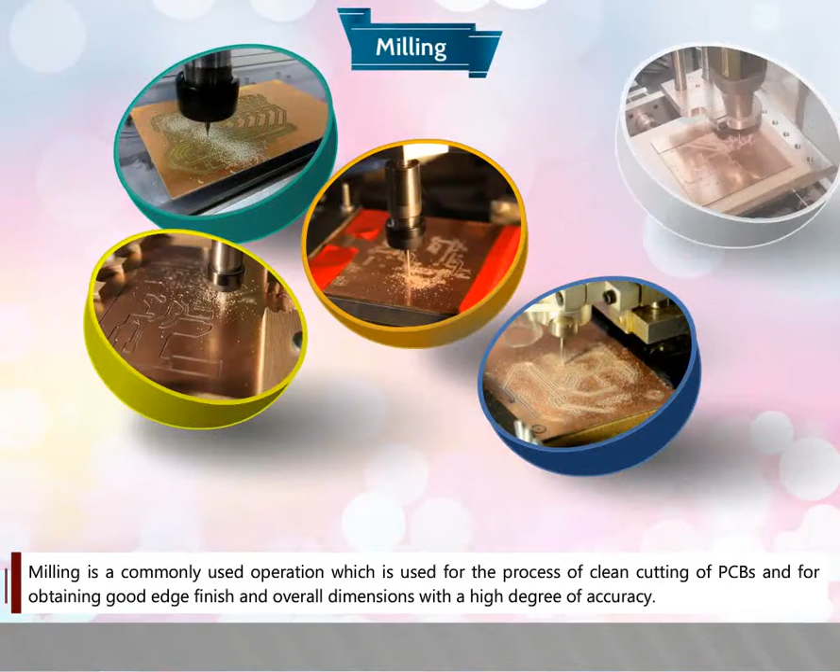Milling. This video describes the process of milling. Milling is a commonly used operation for the clean cutting of PCBs and for obtaining good edge finish and overall dimensions with a high degree of accuracy.

The generally used cutting speeds are in the range of 1000 to 3000 rpm. They usually employ straight or spiral tooth HSS, that is high speed steel, milling cutters. However, in the case of glass epoxy laminates, the use of tungsten carbide tools is preferred due to their long life. During milling, the PCB must be given strong support with backing plates in order to avoid delamination.

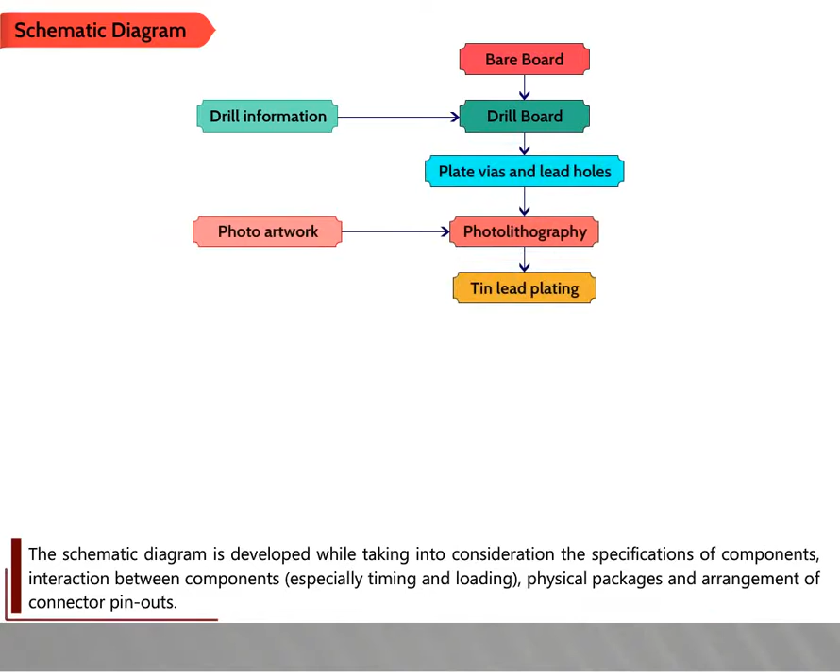Schematic diagram. The schematic diagram, also known as circuit or logic diagram, represents the electronic components and their connections clearly in the most readable form. It is developed while taking into consideration the specifications of components, interaction between components - especially timing and loading - physical packages, and arrangement of connector pin-outs. The circuit diagram references each part on the printed circuit board with a designator, for example IC4, and also the pin numbers for each connection.

Artwork generation. The components and connections in the PCB layout are derived from the circuit diagram, that is the schematic diagram, and it is physically placed and routed by the designer in order to get the best results in terms of board size and manufacturability. The PCB layout defines the final physical form of the circuit, and once the layout is completed, labeling details are finalized. When the PCB layout is complete, the track layout information will be provided on self-adhesive crepe material tape, which is stuck on a plastic sheet such as polyester. The layout or artwork is usually an enlarged one, in the range of 2 to 4 times, to improve accuracy.

Panel preparation. Laminate sheets with copper cladding on both sides are cut to size as per requirement. Even though the size of the panel depends upon the capacity of the plating equipment, the preferred size for many manufacturers is 305 by 406 mm. The laminate commonly used is 1 oz per square foot copper foil, epoxy glass type, or FR4.

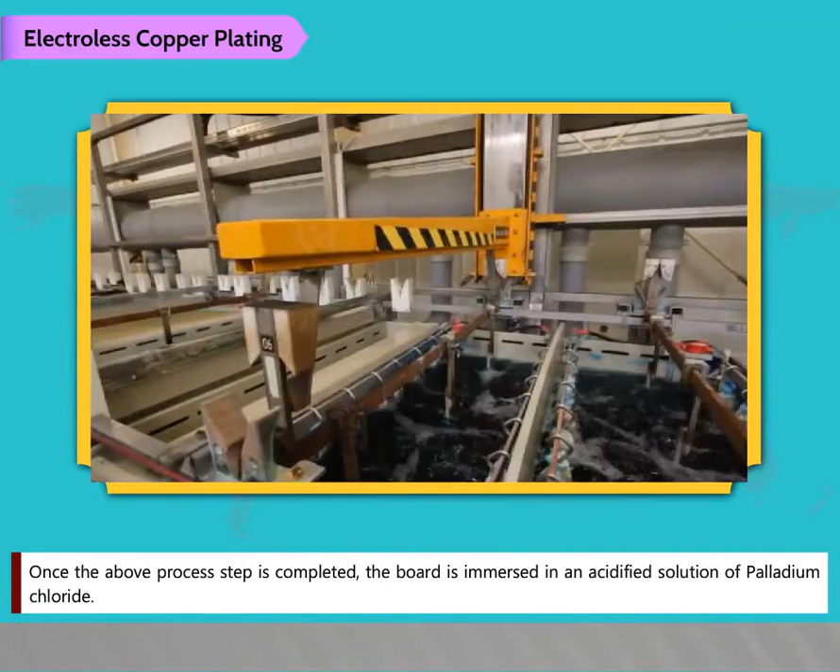Electroless copper plating. Initially, by immersing the board in a solution of stannous chloride, it is sensitized. The stannous ions are absorbed onto the board surface and hole walls, particularly onto the exposed resin. Once this process step is completed, the board is immersed in an acidified solution of palladium chloride.

The palladium ions are reduced to the colloidal state and form a thin layer. This layer catalyzes electroless copper deposition.

Image transfer, that is photolithography. Both sides of the board are covered with a thin layer of a photoresist, which may be either positive or negative and may be solid or liquid. A solid negative working resist is mostly used.

The image transfer process occurs with the photoresist removed from the area where the tracks are to be kept, resulting in a reverse process of the print and etch process. The copper areas will remain on the finished PCB and the hole walls are unprotected, and all other areas are covered by the hardened photoresist. Developing of both sides is usually done in an automatic spray machine.

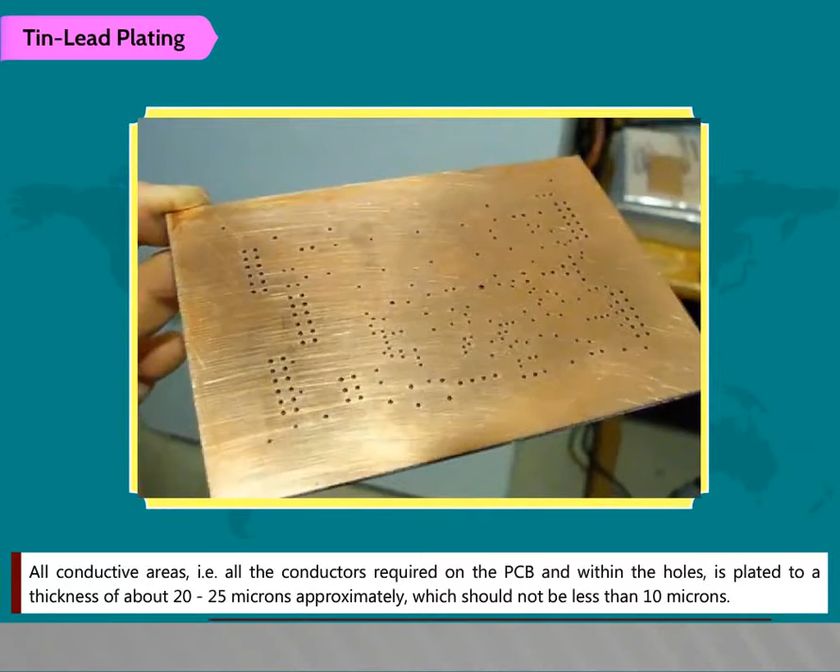Tin lead plating. By immersing the board in an electroplating bath, the exposed track areas are electroplated with tin lead alloy. All conductive areas, that is, all the conductors required on the PCB and within the holes, is plated to a thickness of about 20 to 25 microns approximately, which should not be less than 10 microns. This metal is used as a resist in the etching process.

Etching. The etching process is the core of the PCB manufacturing process, which is based on the subtractive method. It involves the removal of copper from undesirable areas in order to achieve the desired circuit patterns. Etching is usually done by the immersion, bubble, splash or spray method. The spray etching method is the most common. In spray etching, the etchant is pumped under pressure from a tank to the nozzles which splash the etchant on the board. The etchant used should not attack the tin lead alloy.

Once the etching process is done, followed by the application of surface finish coatings such as hot air leveling, solder masking, and organic surface protectant, the selective areas of the board can be plated with precious metals such as gold or nickel.

Testing. The board is then finally inspected and tested as per the user specifications. There is a possibility to get some repairs or rework on the finished boards.

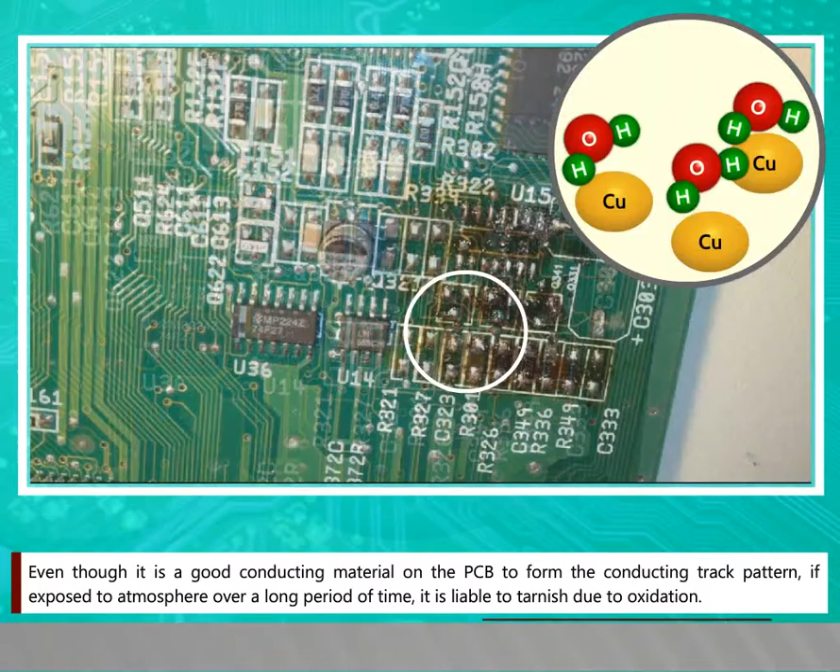Even though it is a good conducting material on the PCB to form the conducting track pattern, if exposed to atmosphere over a long period of time, it is liable to tarnish due to oxidation. It undergoes corrosion and thus loses its solderability.

Therefore, various techniques are used for the protection of the copper tracks and via holes and printed through holes, that is PTH. They are organic lacquer coating, oxide coating, and plating.

Organic lacquer coating is not suitable for long-term usage due to variations in thickness, composition and curing cycles. Though it is simple in application, it can also bring about unpredictable deviation in solderability.

Oxide coating can be used to protect the circuit from corrosion, but it fails to preserve the solderability. Plating or the metal coating process is a standard practice to ensure solderability and protect the circuit from corrosion. So it plays an important role in the PCB manufacturing of single-sided, double-sided and multi-layer, that is PTH boards.

In particular, plating a solderable metal over the tracks has now become a standard practice to afford solderable protection to the copper tracks. Plating process of PCB. Flowchart of plating of PCB.

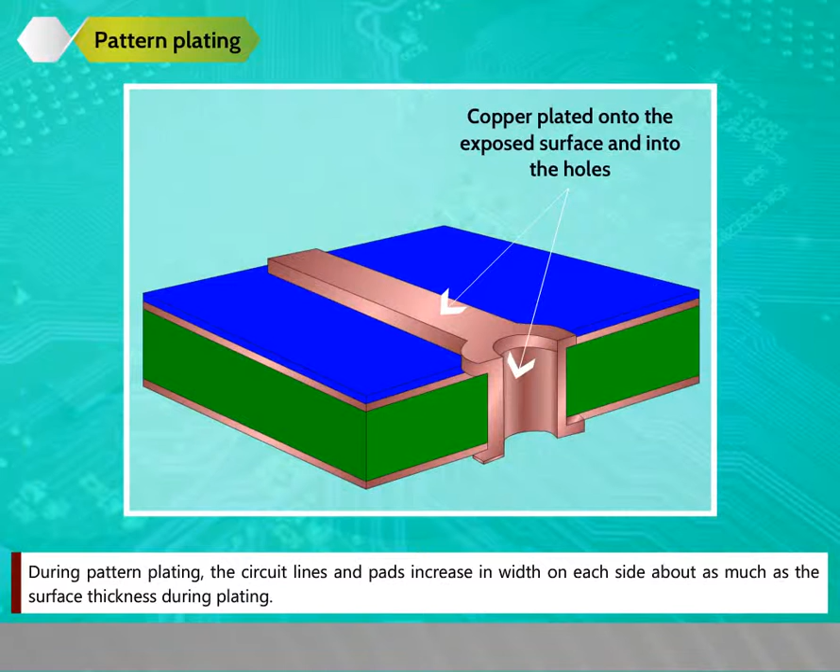Pattern plating is the process wherein only the desired circuit pattern and holes receive copper buildup and etch resist metal plate. During pattern plating, the circuit lines and pads increase in width on each side about as much as the surface thickness during plating. Pattern plating basically involves masking most of the copper surface and plating only the traces and pads of the circuit pattern. Due to the reduced surface area, a much smaller capacity current source is generally needed.

Pattern plating consumes less copper from the anode bank and requires the removal of less copper during etching, thereby reducing bath analysis and maintenance. The disadvantage of the technique is that the circuit pattern is required to be plated with either tin or lead or an electrophoretic resist material prior to etching and then stripped prior to solder mask application, which increases the complexity and adds another set of wet chemical baths to the process.

Panel plating is the process where the entire surface area and the drilled holes are copper plated, stopped off with resist on the unwanted copper surfaces and then plated with the etch resist metal.

When you etch a panel plated board, you end up removing most of the material that you plated. So the burden of extra erosion of the anode banks is exacerbated by an increased copper loading in the etchant.

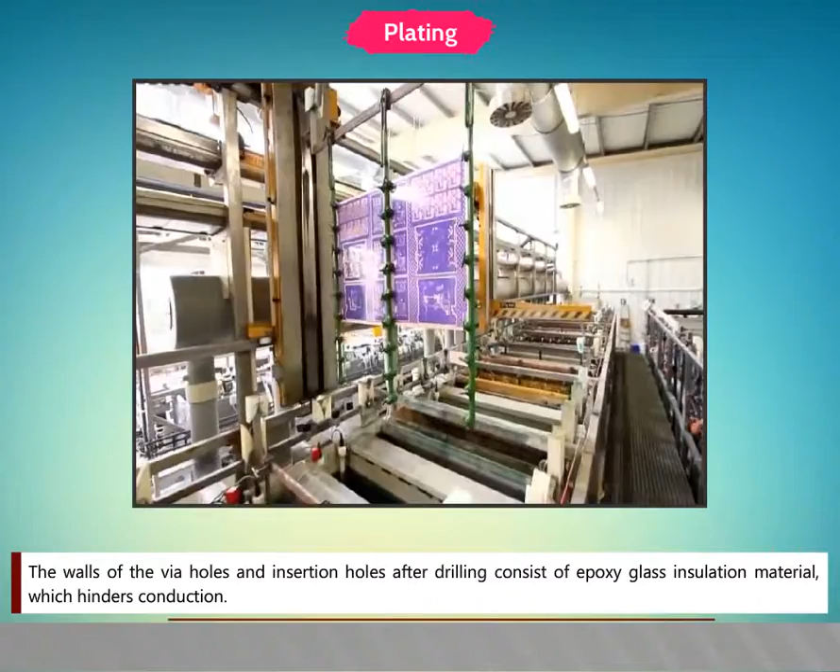The walls of the via holes and insertion holes after drilling consist of epoxy glass insulation material which hinders conduction. Therefore, electroless plating must be used to provide a conductive path, and also the copper coating thickness is increased by means of electroplating process.

Plating techniques: immersion plating, electroless plating, electroplating.

Electroplating is a process in which a metal is deposited on a conductive surface by passing a direct current through an electrolytic solution containing a soluble salt of the metal.

When a unidirectional current is passed through a solution, it results in movement of the charged particles through it. These particles are called ions, and the terminals which are used to pass the current into the solution are called electrodes. The combination of the two electrodes and the solution forms what is known as an electrolytic cell.

The other electrochemical terms associated with electroplating are listed below. Anode: the pole or electrode at which the chemical reaction of oxidation takes place is called the anode. It is a positively charged electrode. During electrolysis, positive ions are formed at this electrode.

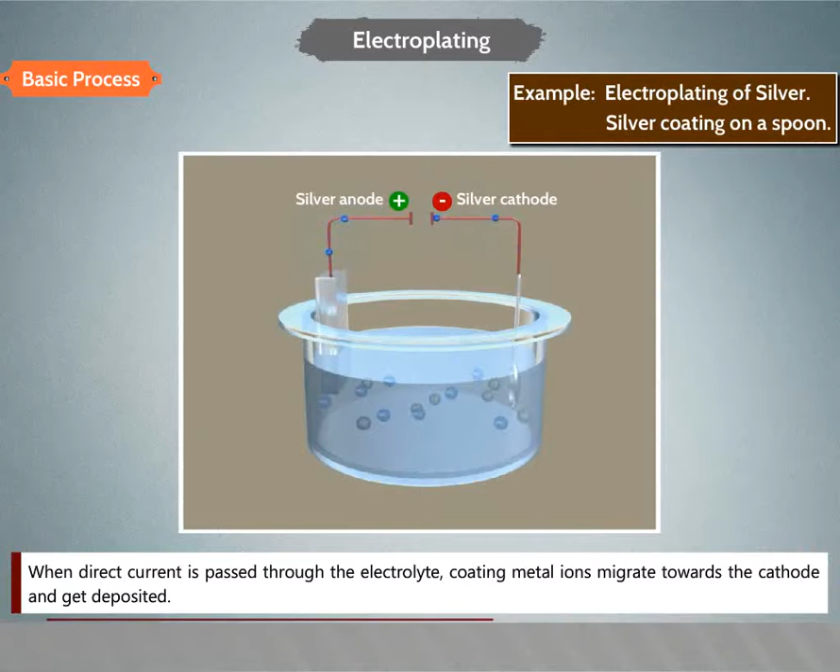The electrolyte is kept in an electroplating tank. The two electrodes, anode and cathode, are dipped in the electrolyte. Let us see an example for electroplating: electroplating of silver, that is silver coating on a spoon. When direct current is passed through the electrolyte, coating metal ions migrate towards the cathode and get deposited.

Most plating solutions are similar in nature. Therefore, their use and the quality of the resulting deposits would depend upon the processing variables involved. Accordingly, the deposition depends on the temperature, current density, metal ion concentration, pH, solution movement and filtration.

Basic electroplating process. If the anode is made up of a metal which is the same as the metal to be deposited on the cathode, the concentration of electrolyte remains the same during electrolysis.

The metal which is deposited on the cathode is removed from the electrolyte. This loss in the electrolyte is compensated since the anode dissolves in the electrolyte proportionately. If the deposition and dissolution are not equal, it will affect both the metal concentration in the electrolyte and the deposition rate.

Electroless plating: the procedure for electroless copper plating is complex. The electroless copper plating process will vary depending upon the size and type of the substrate and the production throughput demands. To ensure that electroless copper plating is done properly, the fabricant must understand the intricacies of the plating chemicals and equipment along with the substrate material used in the PCB.

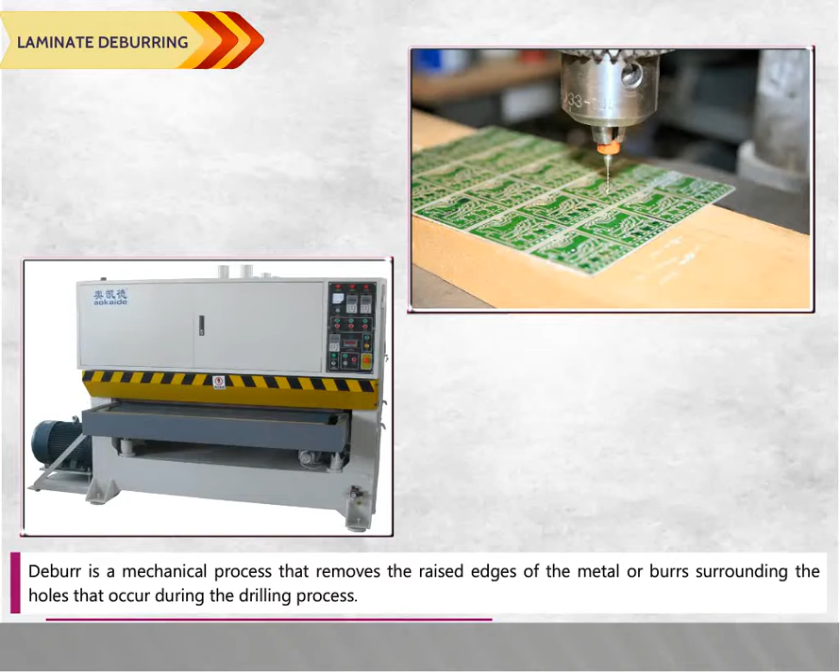Laminate deburring: the drilled board surfaces are cleaned using a deburring machine and a 320 grade silicon carbide brush. Deburring is a mechanical process that removes the raised edges of metal, or burrs, surrounding the holes that occur during drilling. Any debris left in the holes is also removed at this time.

Laminate cleaning: in this step, the drilled through hole is cleaned in an alkaline cleaning solution to remove any fingerprints, oils, grease layers and epoxy smears. The bath contains mixed alkali chemicals, maintained at 60 to 70 degrees Celsius, with a dipping time of about 20 minutes.

Water rinse: after each process step, the substrate is rinsed to ensure that none of the chemicals is transferred to the next bath. Each step relies upon the chemical reaction within itself and can contaminate the reaction of another bath.

Microetching is done using persulfate acid, sulfuric acid, hydrogen peroxide and stabilizers. It is used for microetching or cleaning copper surfaces already existing on the laminate. Some copper is removed from the surfaces and dissolved in the solution to provide a uniform surface. Microetching ensures a uniform metal surface and increases bonding between copper layers by roughing up the surfaces.

This also gets rid of any contaminants that may cause oxidation. The etch back method is used only for multi-layer PTH processing to clean the hole walls.

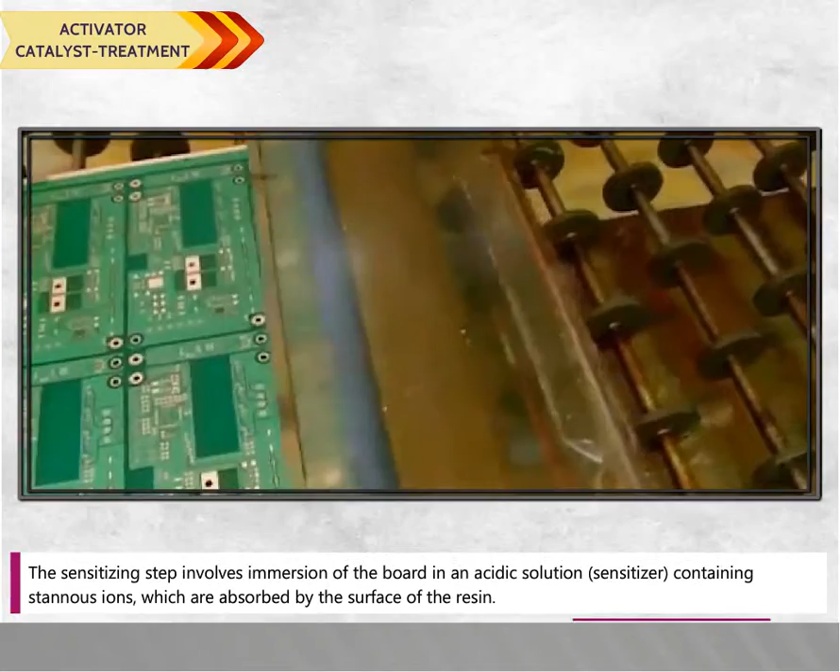The sensitizing step involves immersion of the board in an acidic sensitizer solution containing stannous ions, which are absorbed by the surface of the resin. Through a reduction reaction, the stannous ions reduce the palladium ion, and through an oxidation reaction, the stannous ions are oxidized to stannic ions. The tin is removed in the next step, leaving the palladium layer ready for copper deposition.

The temperature in the activator or catalyst tank is extremely important. To maintain even temperature throughout the bath, an air pump is used to agitate the solution. The board must be rinsed thoroughly so it does not contaminate the accelerator or post-accelerator bath due to volatility. Generally, the PCB is subjected to two rinse cycles.

Accelerator dip: accelerator is a strong acid or alkali used to remove the colloidal tin from the activator bath. Remnants from this bath can neutralize the electroless copper plating bath, so rinsing is again very important at this stage.

Electroless bath: copper is plated on the drilled holes and substrate surface in the electroless copper bath. This can be done as a subtractive or additive process. The subtractive process involves plating a substrate with conductive copper, then exposing it to electrolytic plating. The substrate's circuit pattern is then created by masking and etching, with copper deposited by a chemical deposition method.

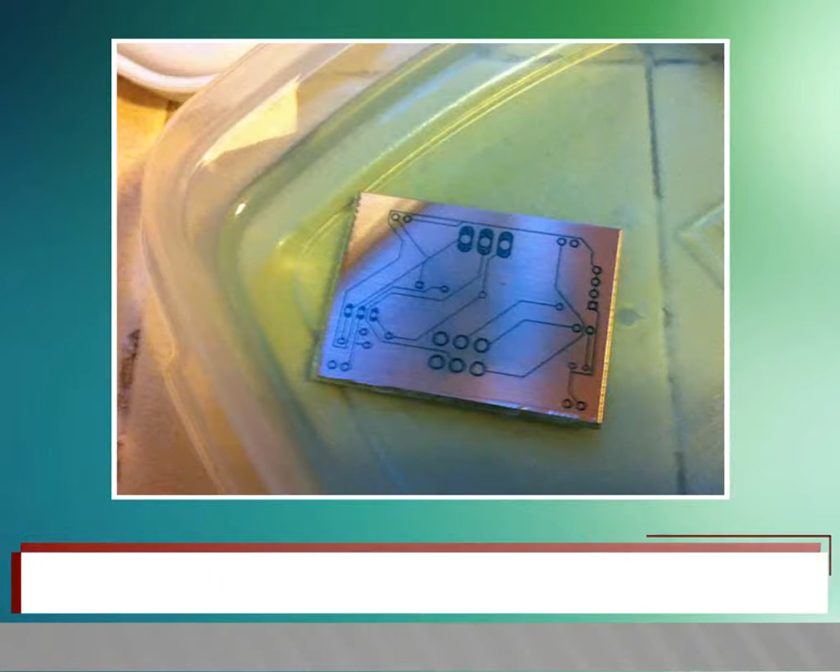The etching process is performed by exposing the surface of the board to an etchant solution which dissolves the exposed copper areas, thereby leaving the desired conductor pattern on the board.

Different types of etchant solutions are in use. Main among them is the following: ferric chloride, cupric chloride, chromic acid, alkaline ammonia.

The choice of suitable etchant for a PCB production depends on factors like compatibility with etch resist, etching speed, copper dissolving capacity, etchant price, and pollution characteristic.

The etching process can be performed by simply immersing the board in an etchant solution and then agitating. This is difficult to control the process and can result in non-uniform etching.

Example of etchant: ferric chloride. Ferric chloride etching solutions are widely used in the print and etch process in the PCB industry. Ferric chloride is the oldest and most common etchant, which normally comes in crystal form. The crystals are dissolved in deionized water to achieve its desired concentration in the solution. This is typically 500 grams of ferric chloride in 1 liter of water.

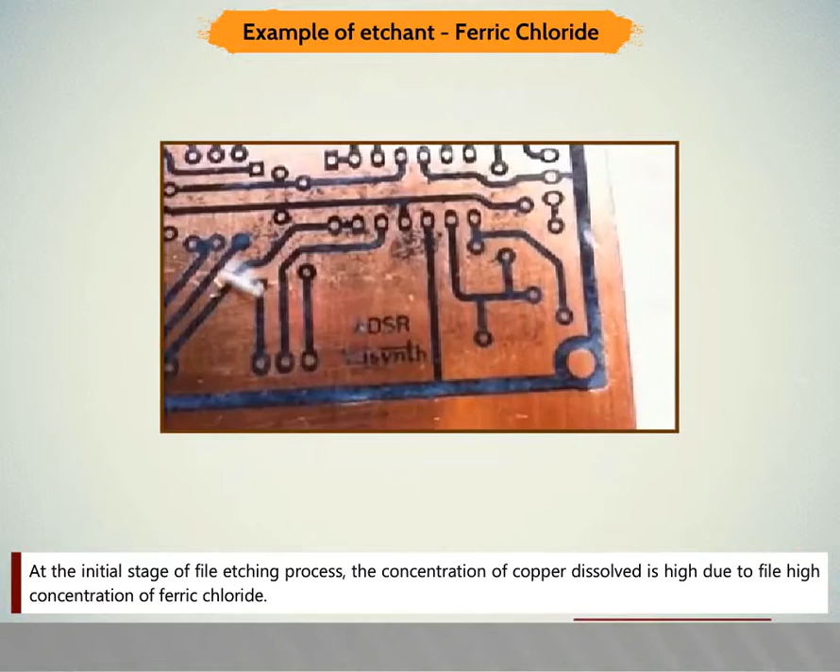At the initial stage of the etching process, the concentration of copper dissolved is high due to the high concentration of ferric chloride. As the ferric chloride in the solution gradually gets depleted, the etching time increases correspondingly. After some time, the solution has to be discarded and replaced by a fresh solution.

When the etchant is sprayed perpendicular to the copper surface, better dissolution of copper occurs and the board is moved. The rate of dissolution of copper depends upon the ferric chloride concentration, temperature and agitation rate.

During etching, the ferric ion Fe3+ oxidizes copper to cuprous chloride, that is CuCl. Then the cuprous chloride further oxidizes to cupric chloride as CuCl2. Cu plus FeCl3 gives FeCl2 plus CuCl. FeCl3 plus CuCl gives FeCl2 plus CuCl2. CuCl2 plus Cu gives 2CuCl.

By crystallization, ferric chloride etchant can be regenerated by passing chlorine gas and to recover copper from the ferric etchant. Ferric chloride regeneration and recovery process.

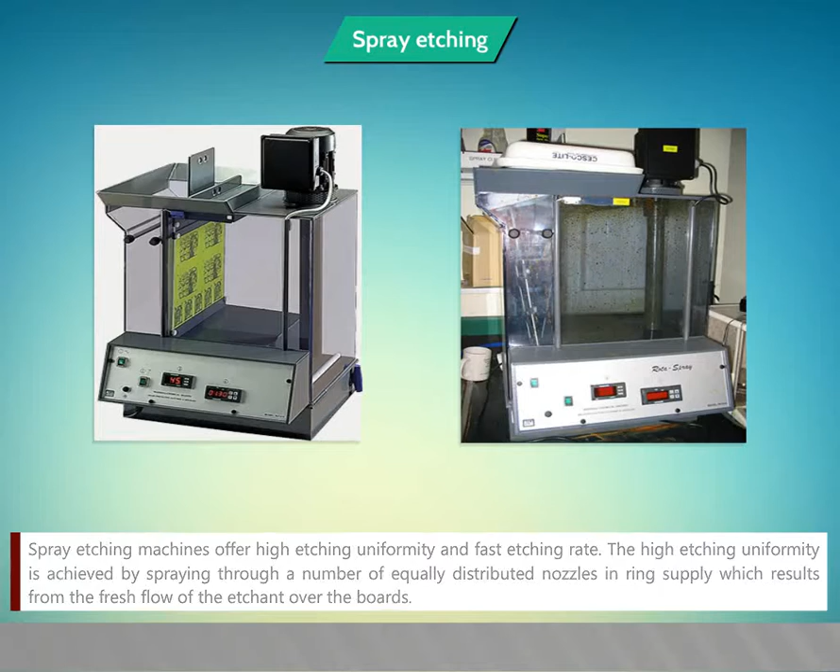However, it is important to control the etching process. Insufficient etching will result in excess copper being deposited on the board, which leads to short-circuiting between the tracks. The use of etchant solution should be carefully controlled as it becomes contaminated with dissolved copper, thereby affecting the performance of the PCB more.

By making use of electrochemical extraction methods, the copper contained in the exhausted etchant solution can be regenerated. After completion of the etching process, the etch resist material is removed chemically, which leaves the PCB with the desired copper pattern.

Shearing. This video explains what the shearing process is and what its instrument looks like. Shearing is the first mechanical operation carried out on PCBs to give them proper shape or contour.

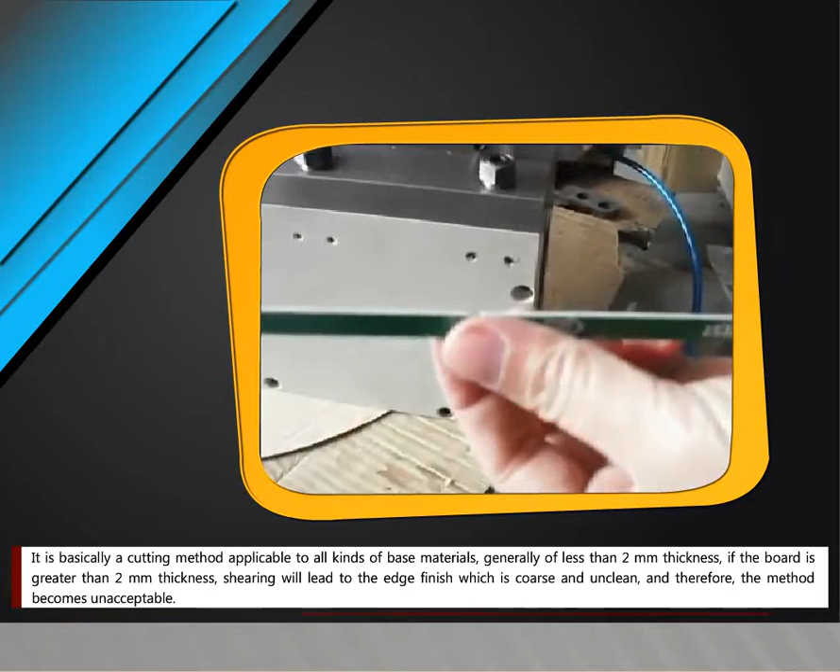Laminate cutting by shearing can be done either by manually operated or by motor-driven machines. Both have common constructional features.

A shearing machine normally has an adjustable set of shear blades. The blades are of rectangular shape in which the lower blade has a free angle of about 7 degrees. The cutting length capability is available up to 1000 mm. The lengthwise angle between the blades is generally preferred between 1 to 1.5 degree, though for glass epoxy materials up to 4 degree can be used.

The angle between the shear blades depends upon the thickness of the material to be cut. The thicker the material, the greater will be the angle.

If the gap between the blades is too wide or the shear angle is too high, feathered cracks appear while cutting paper-based materials. In case of glass epoxy laminates, even though cracks do not develop due to flexural strength of the material, if the shearing angle is too wide or the blade gap is too large, the material does show deformation.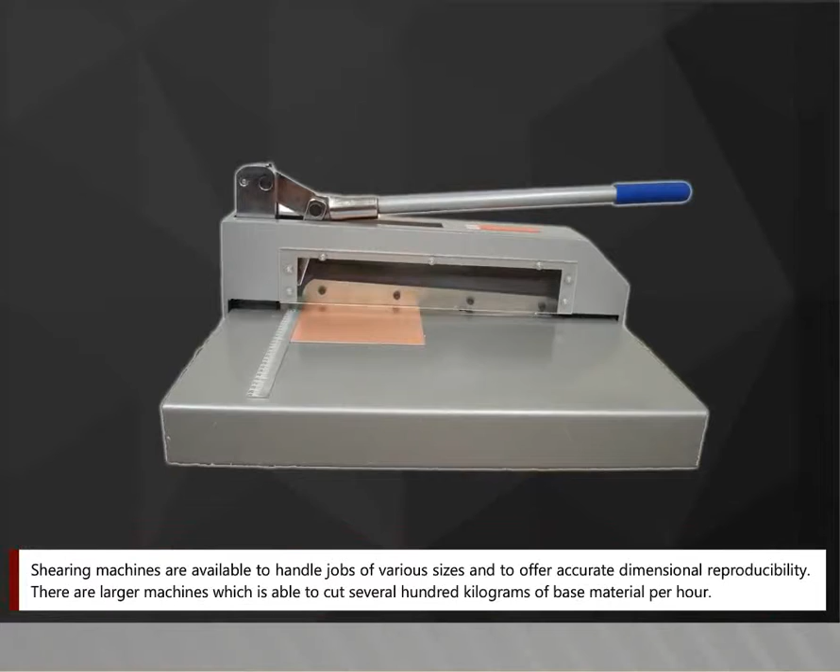Shearing machines are available to handle jobs of various sizes and to offer accurate dimensional reproducibility. There are larger machines which are able to cut several hundred kilograms of base material per hour.

Punching. This video explains the process of punching. Punching of holes in PCBs is also one of the machining operations like hole drilling. In general, large holes are easier to punch than small holes. Punching is used in the high volume production of consumer type PCBs made of paper phenolic and paper epoxy laminates.

Punching of holes. The other disadvantage of punching is the pad delamination and laminate cracks on adjacent holes. In addition, instead of a smooth surface, punching results in holes of conical shape. They are not compatible with the professional PCB plated through hole process, where high surface smoothness is desirable.

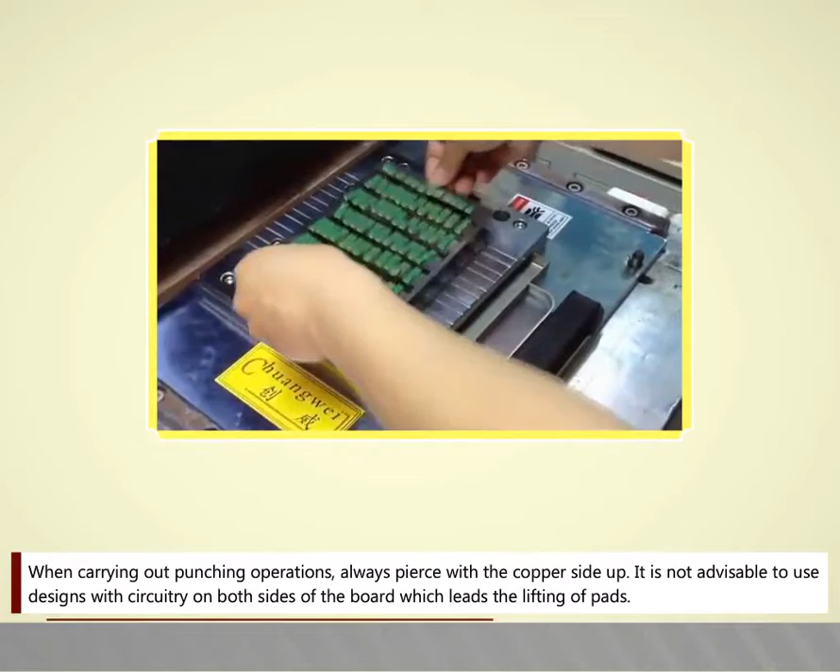When carrying out punching operations, always pierce with the copper side up. It is not advisable to use designs with circuitry on both sides of the board, which leads to the lifting of pads.

Also, if the distance between the holes is too small, there is a chance of cracks appearing between holes. In such cases, the process should be planned such that the piercing is done before any copper is etched away. The presence of the copper foil has a reinforcing effect and helps in eliminating cracks.

Drilling. This video explains the process of drilling in PCB. Drilling operation is one of the important mechanical processes in the manufacture of printed circuit boards. Its purpose is to provide component lead mounting precisely and with structural integrity, and to establish an electrical interconnection between the top, bottom, and sometimes intermediate conductor pathways.

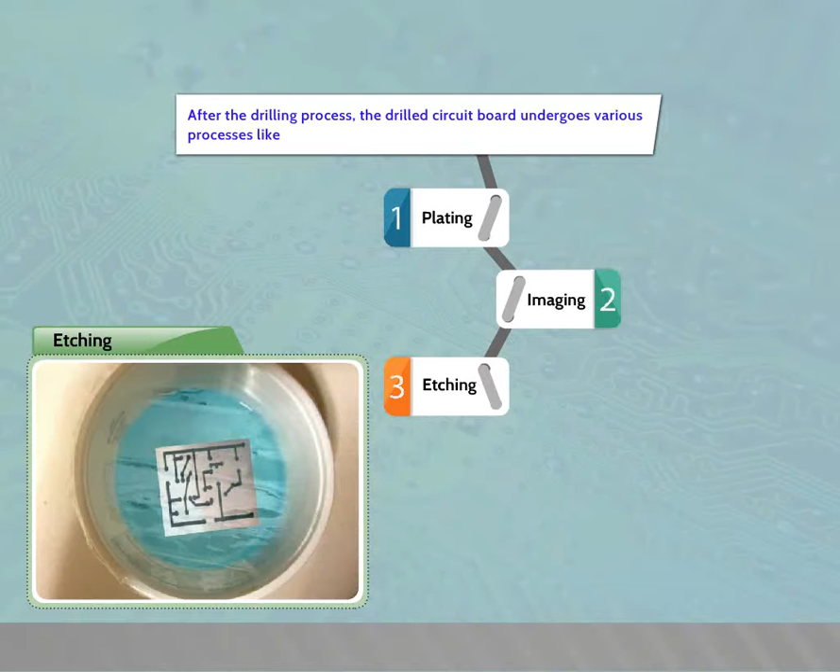After the drilling process, the drilled circuit board undergoes various processes like plating, imaging, etching, and solder plating.

Therefore, care is needed to obtain a good surface on the drilled hole, and hence its quality assumes great significance. The quality of a drilled hole depends upon various factors such as processes including machine accuracy, drilling techniques and operator skill in control, and evaluation of hole quality and drill bits.

Requirements in drilling. A good drilling technique must satisfy the following conditions: consistent high quality, lower cost and simple storekeeping, perfect through-hole plating, greater production and smaller diameter, shorter distance between the holes.

The important steps in the drilling process are typical steps in drilling. High quality drilled holes are obtained when all the processes are properly implemented. Those boards can be plated directly, thereby eliminating other processes such as deburring, desmearing and etch-back. This results in process simplification, higher yields and lower cost.

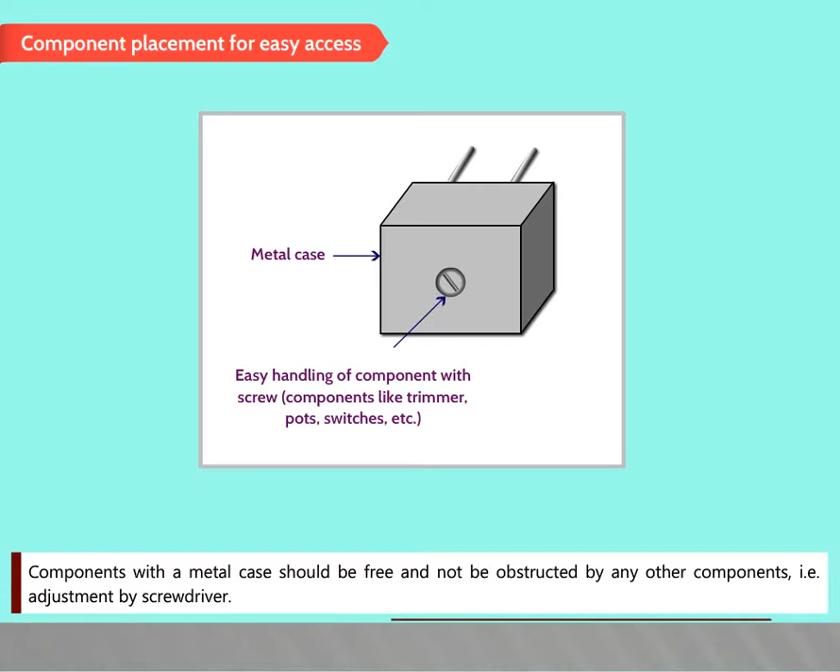Components used for internal adjustment such as potentiometers, trimmers, and switches should be located on the board edge so as to get easy access. Component placement for easy access: components with a metal case should be free and not obstructed by any other components, that is, adjustment by screwdriver.

Distributed mechanism for heat producing components. Heat producing and heat sensitive components are regularly distributed over the entire board area to avoid locally overheated areas. The airflow arrangement should have a free and unobstructed path, flowing in a vertical direction from bottom to top.

Arrangement for heat producing components. Heat producing components as well as heat sensitive components should be placed with proper care, which can be arranged accordingly.

Mounting of components. The following are the main component mounting considerations. All components of the same type should be mounted in the same direction and orientation. The components should be mounted either horizontally or vertically. Heavier components are used with adequate clamps or clips. To avoid mechanical overstressing, solder joints should be as fine as possible.

Sufficient free space should be provided for card guides and card handles. Components that get heated and components sensitive to heating should be placed apart.

Component assembly and precautions. It is important to assemble the components properly and precisely on the PCB. The following precautions must be taken during the assembly of components on the PCB.

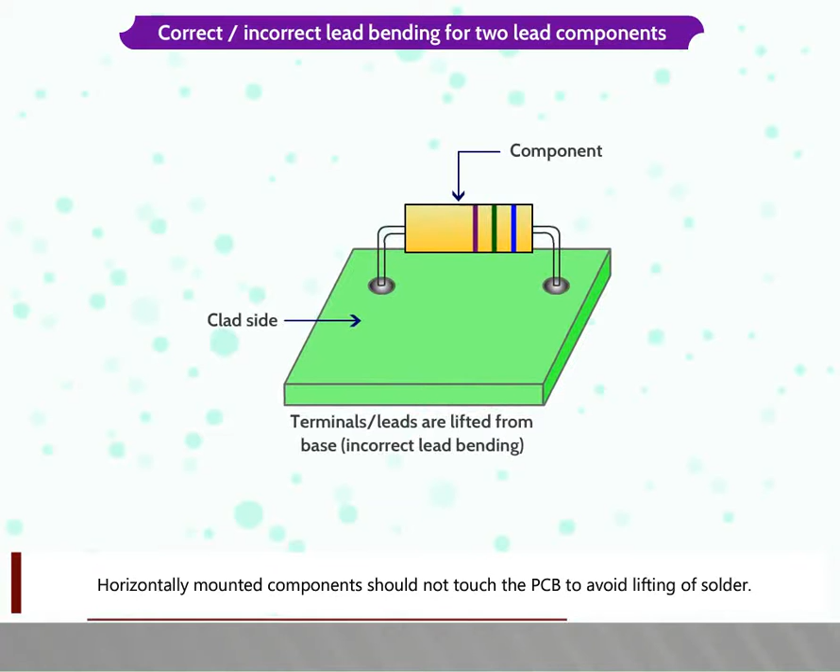Horizontally mounted components should not touch the PCB to avoid lifting of solder. Correct or incorrect vertical mounting: vertically mounted components should not touch the PCB in order to avoid strain on solder joints.

Use of a spacer for separation. Heat producing components must be separated from the PCB with the help of a spacer. Insulation for jumper wires to avoid short: when a jumper is used on the PCB, then insulation must be provided across the conductors.

Transistor mounting with spacer. Transistor mounting with sleeves.

Soldering. This video explains the process of soldering in PCB, types of soldering and how it is tested. Solder, solder wire, solder flux, PCB. A process of joining metal parts by making use of any of the various fusible alloys, that is solder, is known as soldering.

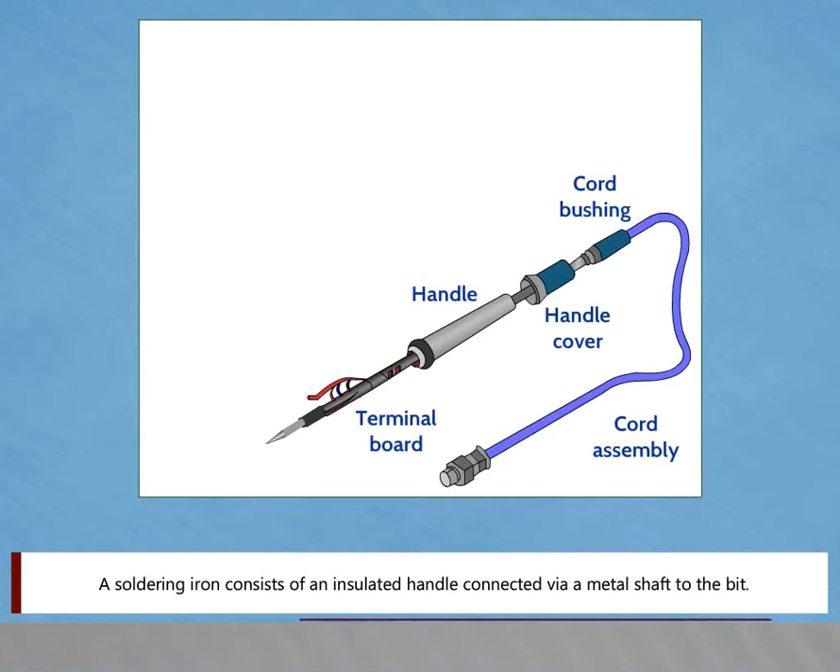A soldering iron consists of an insulated handle connected via a metal shaft to the bit. The face of the bit makes contact with the component parts of the joint and the solder, which needs to be soldered, and heats them up.

The electrical heating element is located in the hollow shaft or in the handle and may be thermostatically controlled to give a preset temperature in the bit.

The bit of a soldering iron stores heat and conveys it from the heat source to the work. Sometimes it may be used to remove surplus solder from joints. The bit should be perfectly wetted, that is tinned, so as to encourage the flow of solder into joints.

All soldered joints must be cleaned before the metal parts are joined, that is, when the component leads are fitted up to the point of the joint and heated for soldering. A flux is applied and then the filler solder metal is applied to the point of joint.

The following steps are used in soldering with the help of a soldering iron. Step 1: parts to be joined are cleaned and fluxed and assembled for soldering.

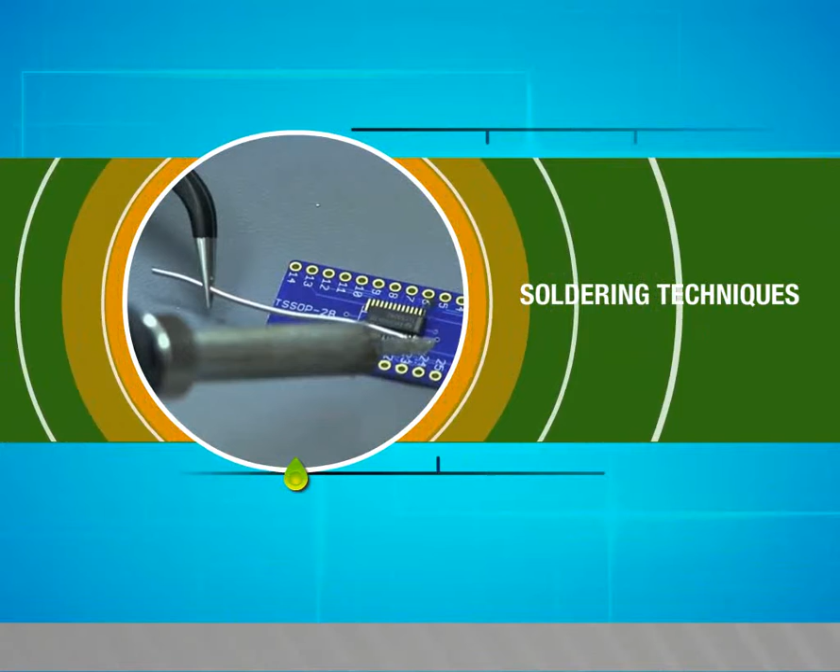Soldering techniques: this video explains the process of soldering in PCB, types of soldering, and how it is tested.

Mass soldering, dip soldering, drag soldering, wave soldering, reflow soldering. Mass soldering.

Mass soldering is a technique used in making a large number of joints, soldering using a solder bath, both as a source of heat as well as solder metal.

In this important soldering technique, a kind of immersion or contact with a molten solder bath is used. In addition to high productivity, more rigorous control is possible over all individual stages of soldering using the mass soldering technique.

This technique is widely used in electronics industries, particularly for assembling a number of PCBs at a time.

Dip soldering: using dip soldering, the cleaned and fluxed assembly is lowered vertically to the clean solder surface until it makes contact. The assembly is then immersed in the solder to the required depth.

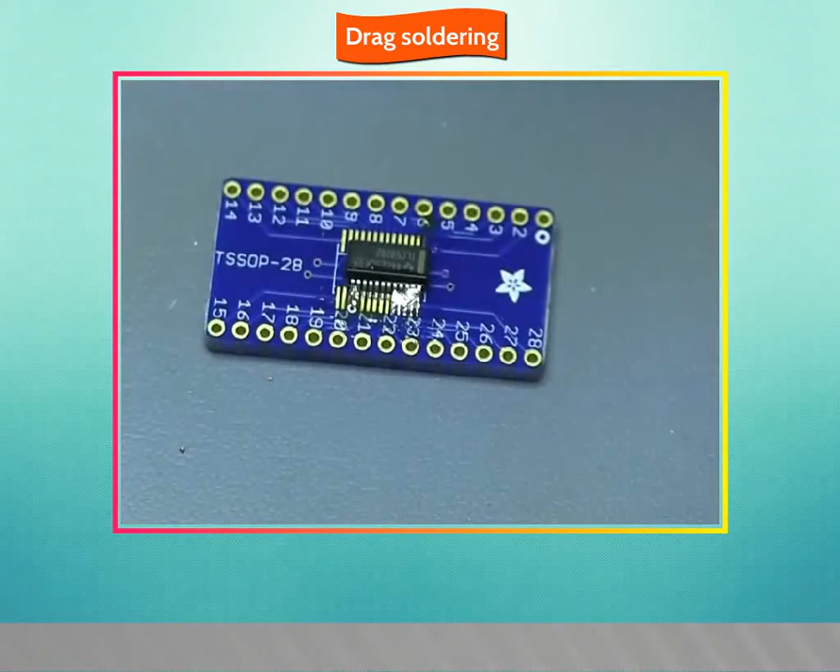The board is lowered at a small angle and then moves horizontally along the solder surface before being withdrawn at a small angle to help solder drainage.

Before the PCB makes contact with the solder surface, a horizontal scraper bar moves along the surface to remove oxide films and flux residues, leaving a clean solder surface to enhance wetting.

Wave soldering: the name wave soldering is derived from the use of waves of molten solder to attach metal components to the PCB.

The process uses a tank to hold a quantity of molten solder. The components are inserted into or placed on the PCB, and the loaded PCB is passed across a pumped wave or waterfall of solder. The solder wets the exposed metallic areas of the board, creating a reliable mechanical and electrical connection.

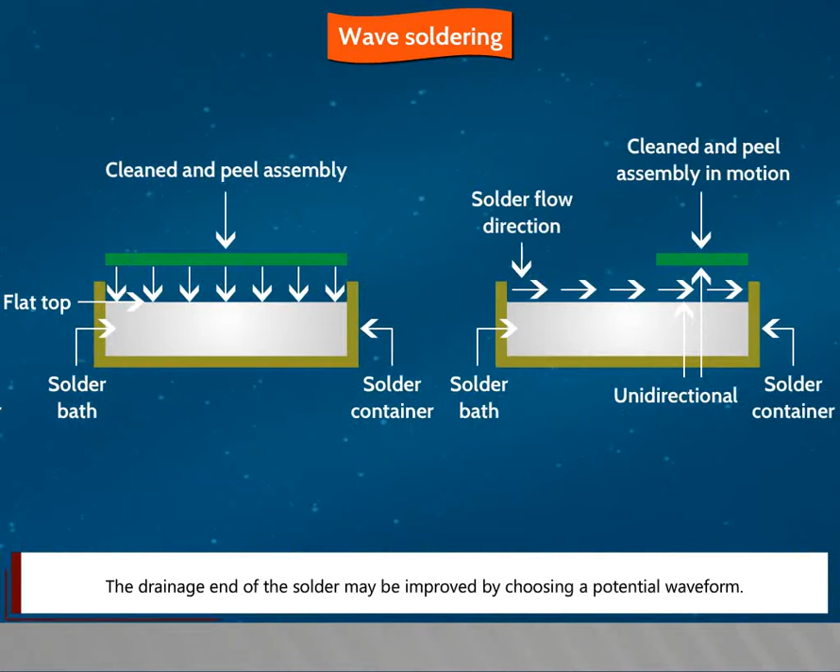Reflow soldering. Reflow soldering is a process in which solder material is used to temporarily attach one or several electrical components to their contact pads, after which the entire assembly is subjected to controlled heat, which melts the solder, permanently connecting the joint.

Reflow soldering oven. Heating may be accomplished by passing the assembly through a reflow oven or under an infrared lamp, or by soldering individual joints with a hot air pencil. Reflow soldering is the most common method of attaching SMDs to a PCB. The objective of the reflow process is to melt the solder and heat the adjoining surfaces without overheating and damaging the electrical components.

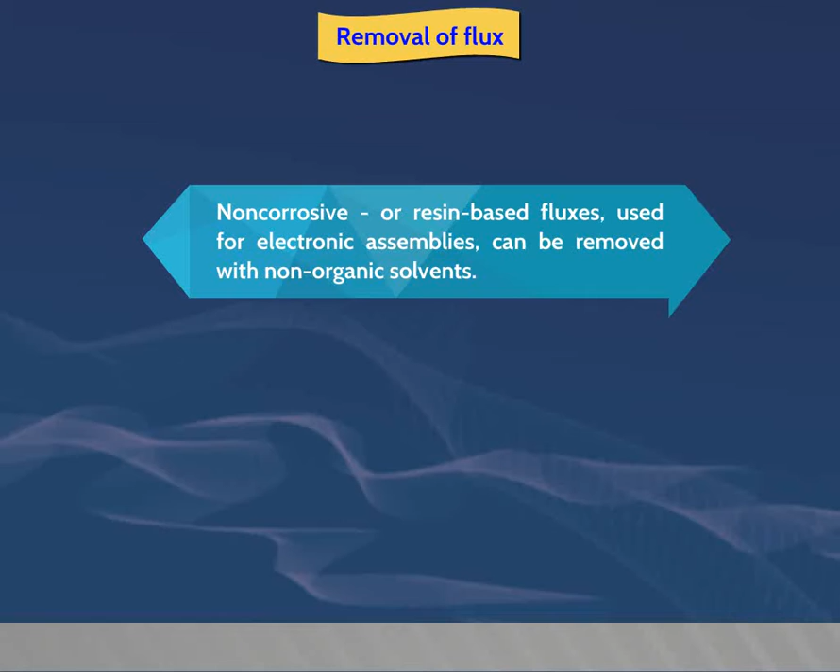Removal of flux. It is important to remove flux residues after cooling of the assembly to avoid corrosion during storage, using dilute alcohol. Corrosive flux is water soluble, for example zinc chloride, so care must be taken to avoid hydrolyzing. Corrosive flux must be removed by first washing the assembly with 0.5 to 1% HCl or 5 to 10% citric or acetic acid, and then neutralizing in dilute alkali.

Non-corrosive or resin-based fluxes used for electronic assemblies can be removed with non-organic solvents. Certain flux activators are only removed by aqueous solutions such as isopropanol. Ultrasonic transducers with organic or aqueous solvents are extensively used to assist dislodging flux residues during washing, with certain risk to electronic components such as electrolytic capacitors.

Solderability testing. Solderability testing of components depends on the measurement of time in contact with molten solder to achieve good wetting under given conditions. The three solderability test principles are: solder bath test, meniscus rise test, and soldering iron test.

Solder bath test. The rotary dip test is a standard test method, suitable for assessing the solderability of PCB, sheet metal, jigs, etc. used by the electronics industry. The test procedure involves immersing a number of pre-fluxed square test pieces, with the solder bath temperature maintained at a certain fixed value. The testing apparatus has a vertically rotating spindle and a radial arm to carry the test pieces horizontally and face down across the surface of the solder bath. The portion of the non-wetted surface becomes less with increasing time in the solder bath until a time of contact is found at which complete wetting occurs.

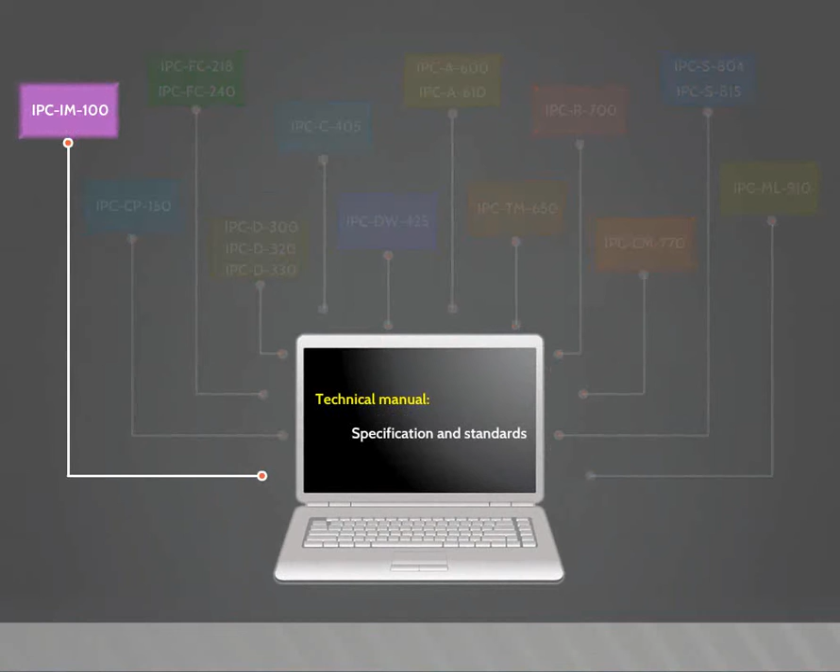IPC IM 100 Technical Manual, Specification and Standards. IPC CP 150 Copper Foil for Printed Wiring Applications. IPC FC 218 General Specification for Connectors, Electric Flat Cable Type. IPC FC 240 Specification for Single-Sided Flexible Printed Wiring. IPC D300 Dimensions and Tolerances for Single and Two-Sided Printed Wiring Boards. IPC D320 Printed Boards, Rigid, Single and Double-Sided, End Product Standard.

IPC D330 Printed Wiring Design Guide. IPC C405 General Specification for Connectors, Electrical, Printed Wiring Board Type. IPC DW425 Design and End Product Requirement for Discrete Wiring Boards. IPC A600 Guide to the Acceptability of Printed Wiring Boards. IPC A610 Guide to the Acceptability of Printed Board Assemblies. IPC TM650 Test Methods Manual.

IPC R700 Suggested Guidelines for Printed Wiring Board Assemblies. IPC CM770 Guidelines for Printed Circuit Board Component Mounting. IPC S804 Solderability Test Methods for Printed Wiring Boards. IPC S815 General Requirements for Soldering of Electrical Connections and Printed Board Assemblies. IPC ML910 Design and End Product Specification for Rigid Multi-Layer Printed Boards.